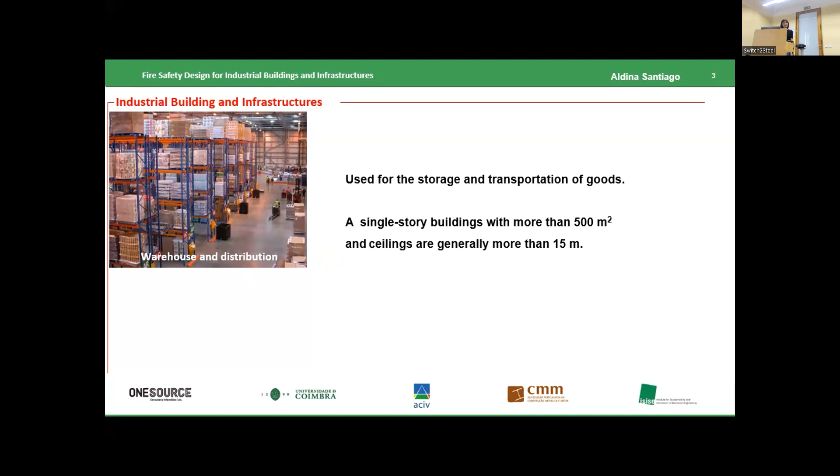It is used for storage and transportation of goods, and normally we have a single-story building with large dimensions, normally with areas higher than 500 square meters and with a height higher than 15 meters. But we are also talking about manufacturing facilities with heavy equipment, and this is very important for this subject of fire safety design, normally this kind of building has 3-phase electrical power, with a high capacity of ventilation and a high system of exhaustion.

In general, these buildings also have pressurized air, water lines with floor drains and storage tanks. But we are also talking about refrigeration and cold storage, normally used for food products, with small or large rooms for cooling and freezing. And we are also talking about buildings for telecom and data hosting centers, again large facilities with extensive computer servers and associated equipment, normally with redundant power supply, with heavy equipment, and normally with a strong floor to support this heavy equipment.

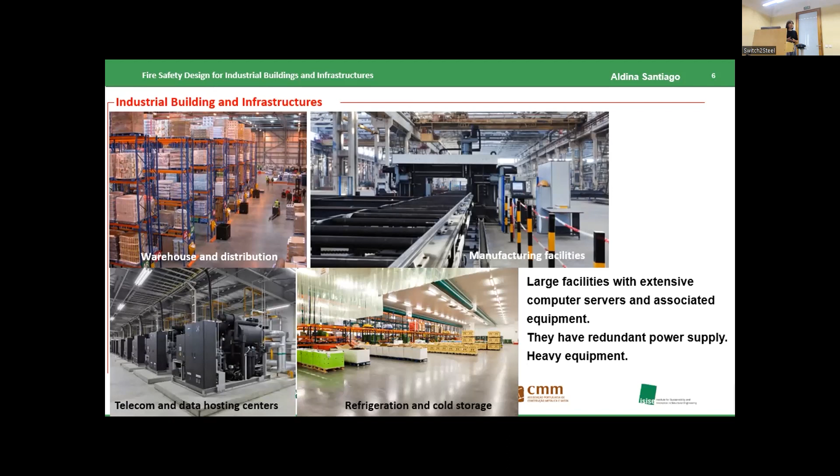And about infrastructures, we may say tunnels, terminals, large compartments, at least in one direction, in this case with high ventilation. So we have here some examples, at least 6 examples of the scope of buildings that are in the scope of this presentation. So this is how we try to answer the first question. And now about the second question.

I also tried to find official numbers, and from 2021, the last official numbers we have show 654 industrial fires in Portugal. That means more or less near 2 fires per day in industrial buildings. So this number is too large. The number of fires in industrial buildings is too large, and this is the reason why we started this project, and why now, at the end of the project, we have this seminar.

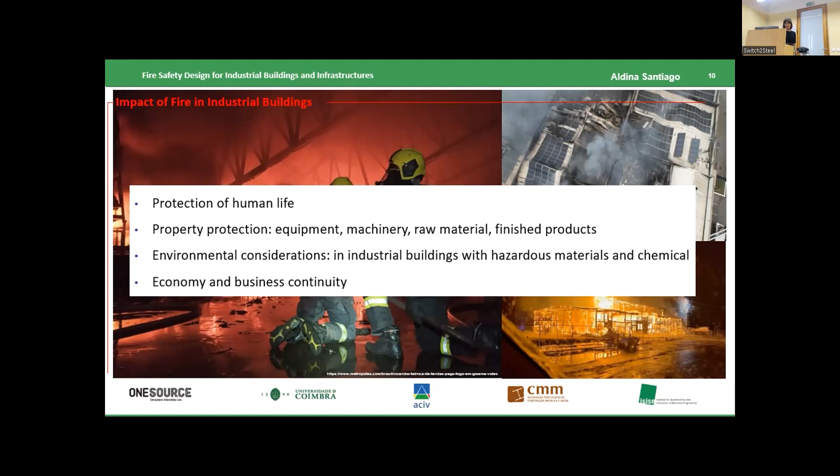And of course, at the end, we have the loss and the interruption in the economy and in the business of these factories.

So now I will pass to the second point, related to legislation. I will start first with an overview of the Portuguese legislation for this kind of buildings, and after that I will make a comparison with the European legislation.

Starting with the Portuguese legislation, we have two documents: Decree Law number 123, the last version from 2019, and Technical Regulation 1532, whose last version, though not from 2008, has its main contents from the 2008 version.

In the first document, we have the organization of the different types of buildings and enclosures. We have defined, at this moment, 12 standard uses for the different buildings, and for each one they are organized into 4 risk categories. After, I will show how to calculate this risk category.

The second document provides the technical regulation for fire safety design in terms of fire behavior, insulation, and fire protection. So first we make a characterization, and after we do the fire design.

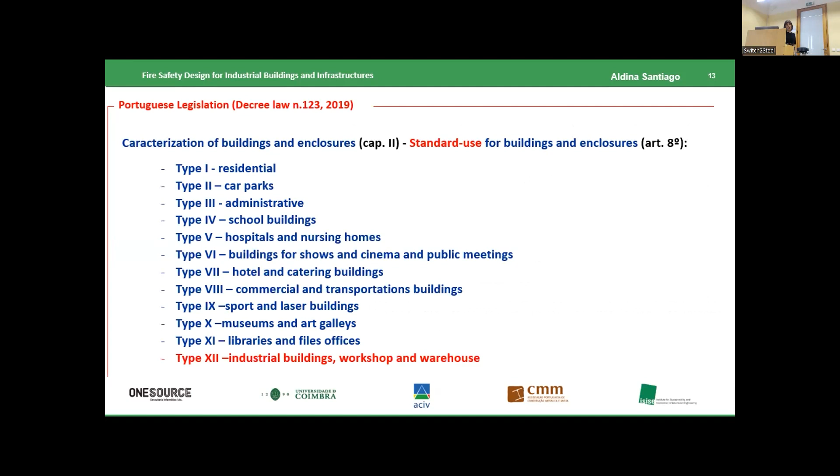Starting with the first document, as I said before, we have 12 standard uses, all of them shown here. For this specific case, the industrial building, we have standard use number 12: industrial buildings, workshop, and warehouse. After, as I said, we need to calculate the risk category.

We have 4 risk categories, from the first to the fourth. The first one is a reduced risk, and the fourth category is a very high risk. How to calculate this risk category?

There is a table defined in this decree law that allows calculation of this risk category based on the number of floors below the ground floor, and also based on the modified fire load. This modified fire load would be calculated based on a deterministic approach or a probabilistic approach, but in both cases it depends on the materials and all the contents of the compartment.

In this case, the industrial compartment. So after that, it is possible to define what is the risk category for our building.

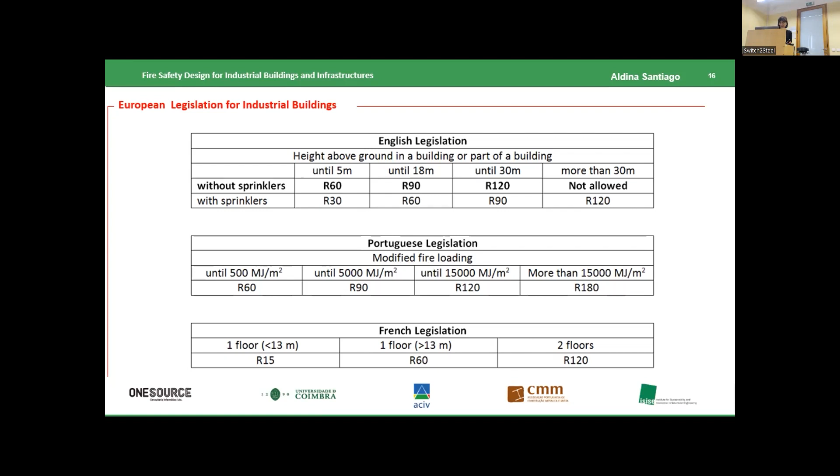Now I go to the third topic, the principles of the fire safety design, starting with the fire safety of the industrial building, the main concepts. First, fire prevention - good maintenance of the equipment, for example, but also the fire detection and the alarm system, the detection of smoke, the detection of flames, but also the need - this is imposed on the design - the emergency planning and evacuation. All occupants of the building should know and understand the fire evacuation plan.

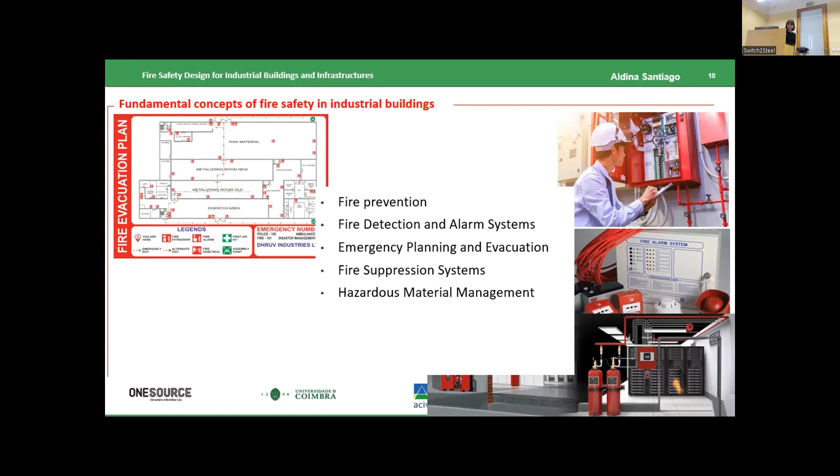And after, the existence of fire suppression systems, for example sprinklers, the good storage of hazardous materials, the continuous training and education of workers, and at the end, probably more directed to our seminar, the design of the structure according to the standards, taking into account the necessary fire protection for the structural elements.

Now looking at this last topic, the structural fire protection, we could take two approaches for the design, and I divided these two approaches taking into account the typology of the buildings. If we have a small compartment, it is possible to assume a uniform temperature in all the compartments - the same temperature at each point - and this temperature could be calculated based on the nominal curves that we have in the standards.

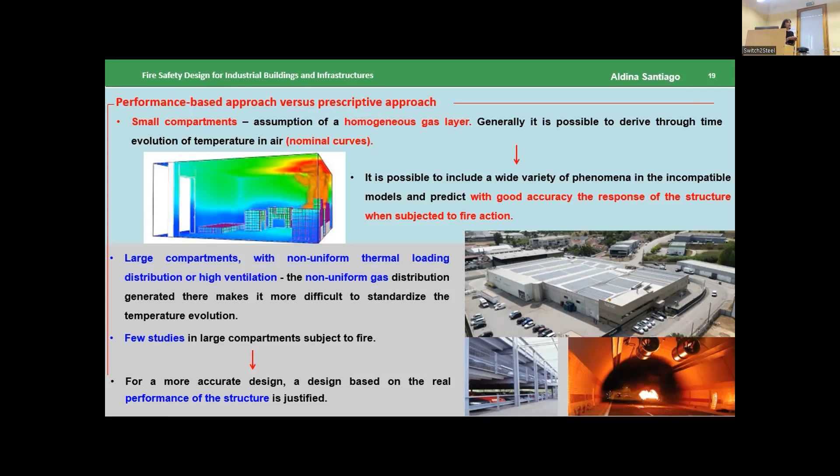However, if you have large compartments with non-uniform temperature and large ventilation, it is very difficult to have uniform temperatures, so the nominal curves used for small compartments are not possible to use in this kind of compartment. We have this situation for industrial compartments. So the nominal curves that we have in the standards are not possible to apply for this kind of building. In this kind of building, we should make the design based on the real performance of the building, taking into account all the conditions of the building.

According to the Eurocodes, when we have a well-defined compartment, it is possible to do a prescriptive approach design. In this prescriptive approach design, we make the design based on nominal curves - we have, for example, the well-known ISO 834. And after that, we make the analysis of the structure, which could be the analysis of elements, substructure, or the entire structure.

And after that, we make the design of the elements, the substructure, or the structure. The design for the elements, for example, could be based on tables, tabulated values - not for steel structures, but for example for concrete structures it is possible to do a design based on tabulated values. And after, it is possible to do the design based on simplified equations or more sophisticated equations.

When a performance-based design is needed, for sure we have more complex calculations, but we have a more precise response and the correct response at each point of the compartment. It is possible to have the variation of temperature at each point of the compartment, to know the transport of smoke, the transport of heat - we have all the details in the compartment. So in this case we have a more accurate design, and sometimes it could be a more economic design too.

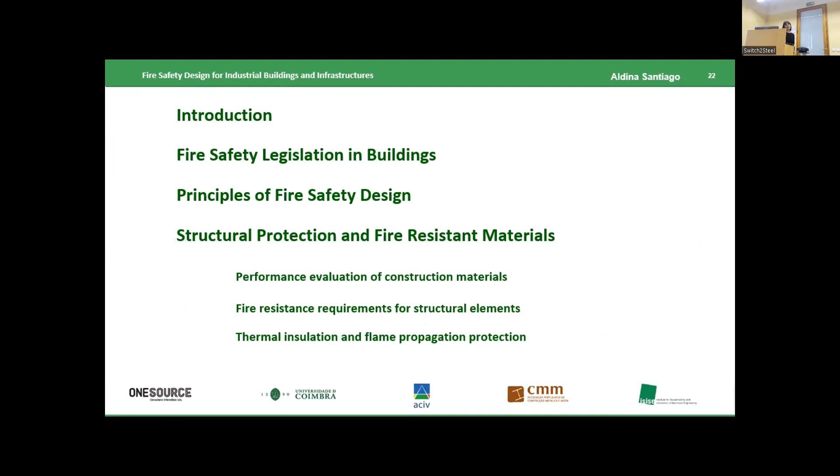Now I go to the fourth point: structural protection and fire-resistant materials. According to the legislation I showed before, we should divide the fire protection measures into two types: active measures, which I already mentioned, like sprinklers, smoke detectors, flame detectors, and passive fire protection measures.

In this case, because I'm looking at construction materials, I'm focused on the passive fire protection measures. In passive fire protection, I have to take into account two different systems. First, the structural system, where I need to ensure the stability and integrity of the building in case of fire. But we also have non-structural systems, where we need to take into account limiting the propagation and development of the fire. To account for these two topics, there are standard tests.

The first is the fire reaction test. These tests evaluate how the material contributes to the development of fire, or better, how it contributes to the beginning, development, and propagation of the fire. Based on these tests, it is possible to classify materials into different classes.

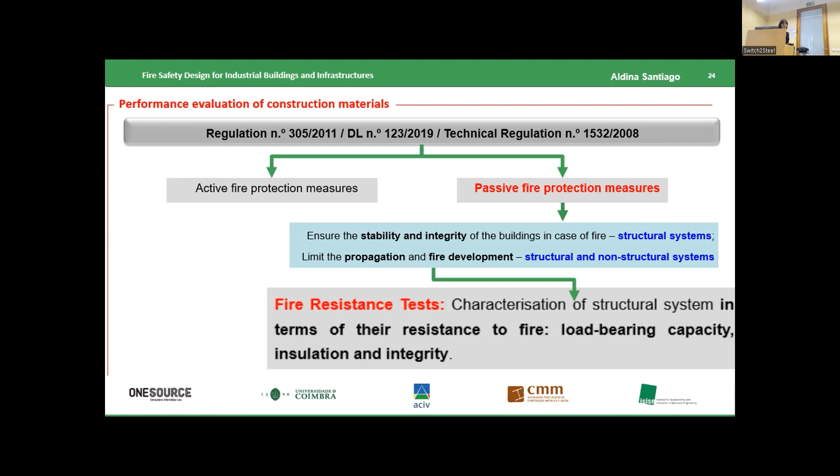The second topic is the fire-resistant tests. In this case, I'm not evaluating the material's behavior or its contribution to fire, but evaluating the structural system in terms of its resistance in fire: load-bearing capacity, insulation, and integrity.

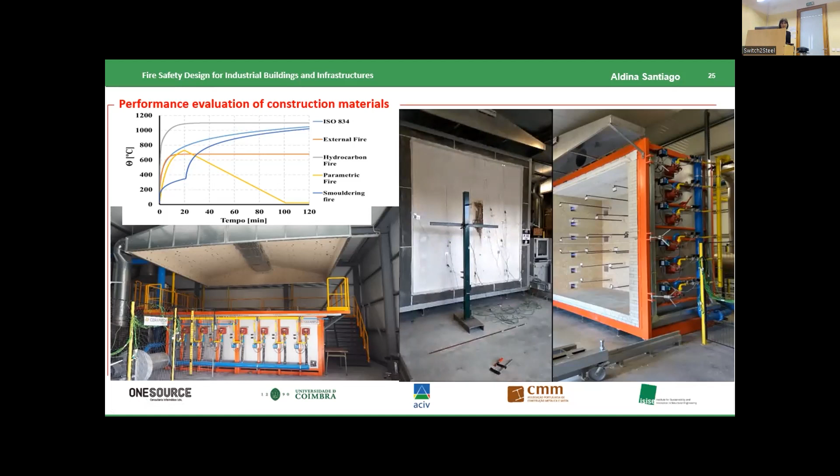We have furnaces here in the lab where it's possible to evaluate this fire-resistant capacity of horizontal and vertical elements, and it's possible to apply different thermal load curves to these elements, the standard curves, but also parametric curves.

After showing the reaction and resistance of materials, I go directly to the standards. The design of these elements is based on the Eurocodes. First, Eurocode 1, which defines the loads. In this case, because I'm looking at thermal loadings from fire, I should look at part 1.2 — Eurocode 1 part 1.2 is related to thermal loadings.

After that, I need to go to the design. There are several Eurocodes for design, and the part related to fire is always part 1.2. Eurocode 2 relates to concrete, Eurocode 3 to steel, and Eurocode 4 to composite structures.

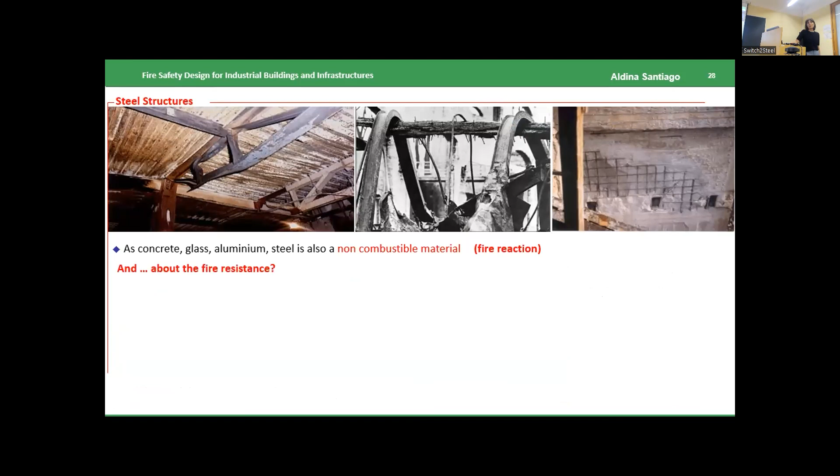Looking at the fire resistance of steel, I know that the strength of steel degrades very fast with increasing temperature. I also know that the thermal conductivity of steel is very high, around 45, while for concrete it's around 1 or 2. We also know that steel profiles are very slender compared to other cross sections, so the temperature increases very fast in the steel cross section.

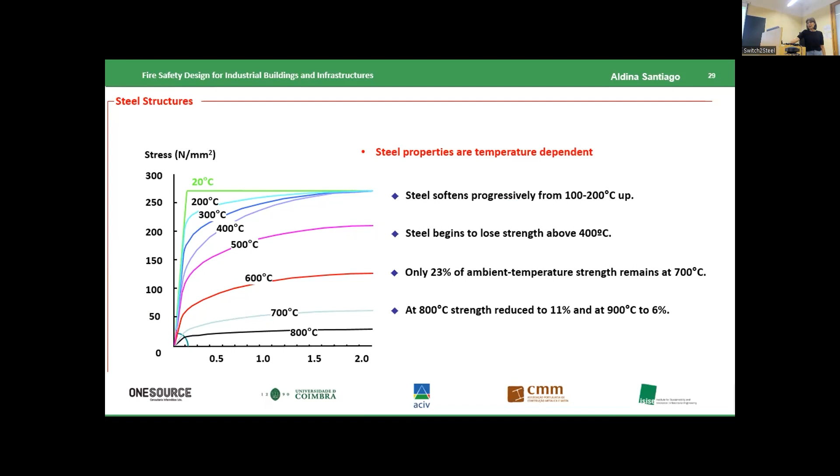I put here to show that the strength of steel degrades very fast. I put here the curves of the degradation of the properties of steel with temperature from 20 degrees to 800 degrees. The steel softened progressively from 100 to 200 degrees up, and began to lose strength above 400 degrees. Only 23% of ambient temperature strength remains at 700 degrees. At 800 degrees, strength reduced to 11%, and at 900 degrees to 6%.

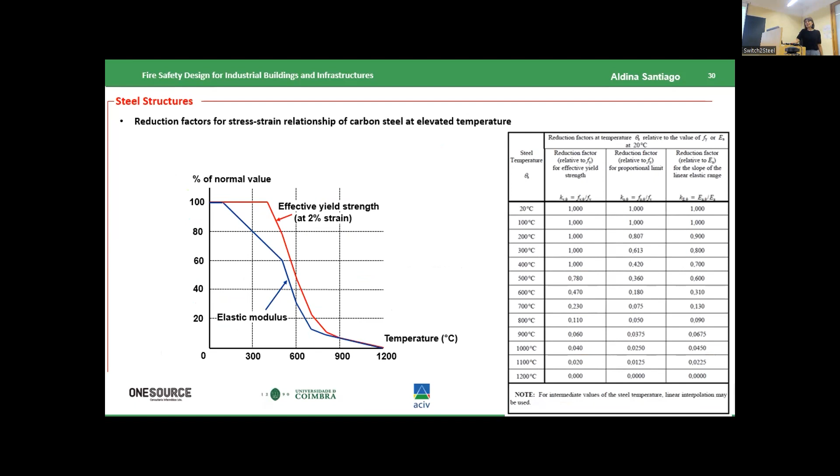Normally, the temperature in a fire in this kind of building is around 1,000 to 1,200 degrees or less, so these values are the normal temperature in a fire in a compartment like that. And the steel melts at around 1,500 degrees. I have here also the comparison of the degradation of the yield strength with the elastic modulus. The stiffness reduced much more faster.

Okay, and to finalize, some remarks about thermal insulation and flame propagation. We need to take into account first the fire protection measures. We need to use fire resistant materials, as I said, for class A, but we need also to consider fire barriers, fire stop, fire resistant insulation.

We need to take into account the compartmentation. Normally, these industrial buildings, as I said at the beginning, have a large area, but it is necessary to have a compartmentation, taking into account the material that we have in these buildings, a division of the structure into fire-resistant compartments, or using fire barriers to prevent the spread of fire and smoke. It is necessary also a continuous fire monitoring and safety system. Okay, thank you very much.

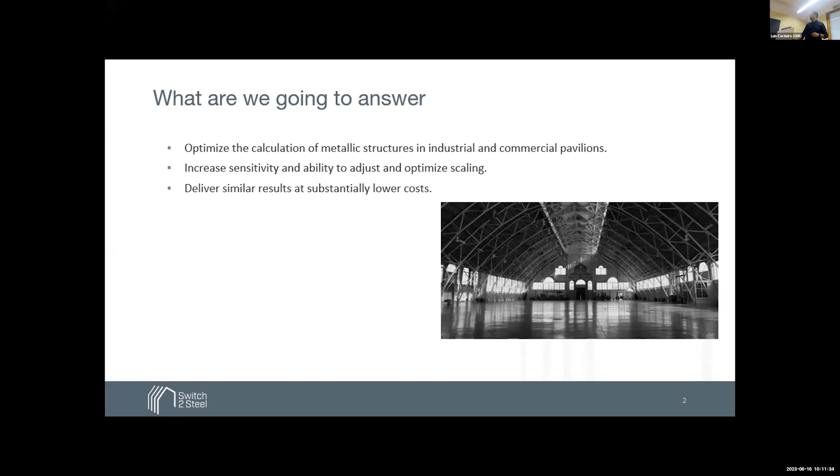To increase the sensitivity and the ability to do these calculations, and to show that we can lower the cost, not only of construction but also transport, maintenance, and many other aspects that involve a building, in this case a pavilion, and how steel can impact these costs and how we can see real value in this. So the problem, as presented before, we have continuous legislation changes. We have legislation throughout Europe, but then very specific country focused legislation, and we need to consider this in all the steps of what we are doing.

It is really difficult to calculate these structures. So many options, so many types of steel, so many types of solutions. We tried to gather all the benefits of these different options and put them together in a way that we can provide you solutions. You can simulate different options very quickly, and find quick and quite efficient results.

Always keeping in mind compliance and safety as presented before, and ensuring these legislations are properly applied to all aspects of what we are doing. That is really important. And again, the protection for fire, which is one of the main drawbacks of using steel, we can identify in an automatic way which is the best solution for your specific needs, and give you an estimation of that cost. You can also compare it easily with other options available, ensure these also comply with legislation, and give at the end the power to the user making these simulations and analysis.

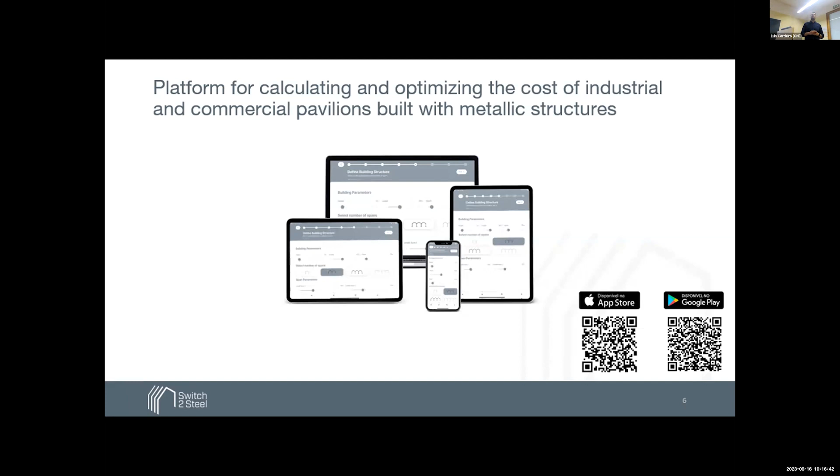These calculations are not done on your mobile phone because they are quite extensive and take some time. You will receive a report and notification when the calculation is done. Depending on what you need, calculation can go from a couple of minutes to a couple of hours, but it's just a matter of what you have identified as the interest for these details.

So the goal is exactly what I've presented before: a multi-channel approach for everyone to access the tool, parameterize exactly what you need, and get optimizations with different techniques for the structure and also the protections needed. Taking into consideration the legislation, as said before, characteristics of the pavilions, fire protection, transport, seismic resistance, and the environmental impact throughout the whole chain of the building, from beginning until the end.

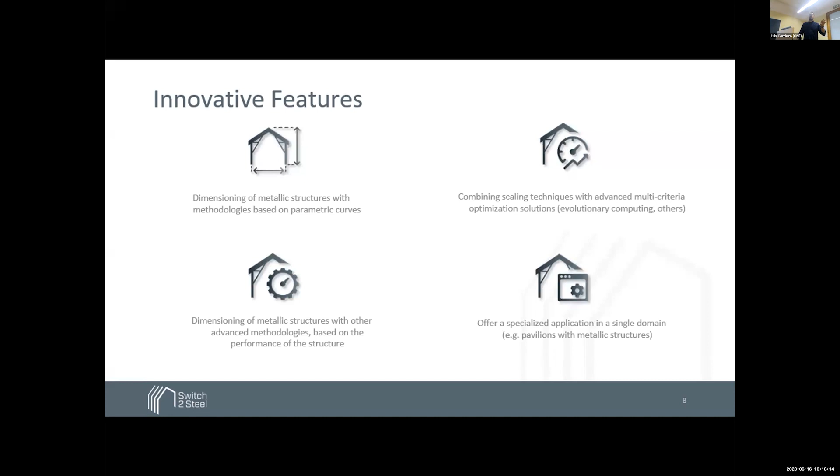So as you can see, there are a lot of innovations in what was done. We identified four innovation aspects of this work: the dimensioning of the structures, the combining of different techniques to give you the best solution, which will be presented later in more detail, the dimensioning of the structure with quite different solutions based on characteristics, and basically a very focused solution on pavilion construction with steel.

Very briefly, and my colleagues will present this in more detail, we have used genetic algorithms for some optimizations. The room and elevated temperatures were taken into consideration throughout multiple steps of the process. We use finite element methods for some of the analysis and optimizations, always considering the Eurocodes in all aspects of what we are doing, to be compliant.

Okay, so I'm missing one slide here. So instead of me presenting the application with slides, we are going to have a real-time demonstration of the application. We will split this into phases. The first one is where we say what we need to build, and the second one is to show you the result of what was done.

We will design a complete step with some predefined configurations. Because that algorithm will take around 20 minutes to run, we will see a pre-calculated aspect of it.

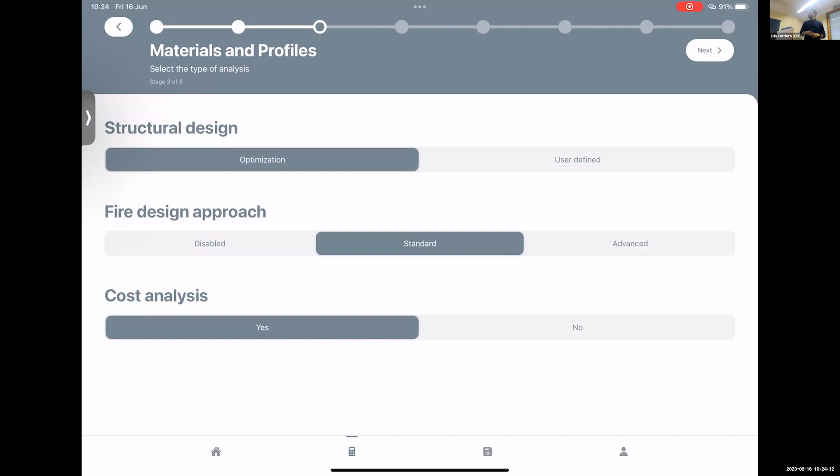And finally, we can even give you an estimate of the cost of each aspect of the pavilion. Okay, and we will see, because we are going to use that option.

Next, since we are working with steel, let's define some parameters of the steel we want to use. Here, you can switch some characteristics of the profile, for the sections, for the columns. You have some options available—not everything is there, we are at the moment limited to a couple of them, but you already have quite extensive options.

Next, let's describe our pavilion—what do we need? One of the key things we have to identify is the spans, how many spans we have.

Here we are going to describe the height, the length of the span, and the length of the building. Of course, when you start changing these parameters, we are already limiting you on the number of spans that you can add.

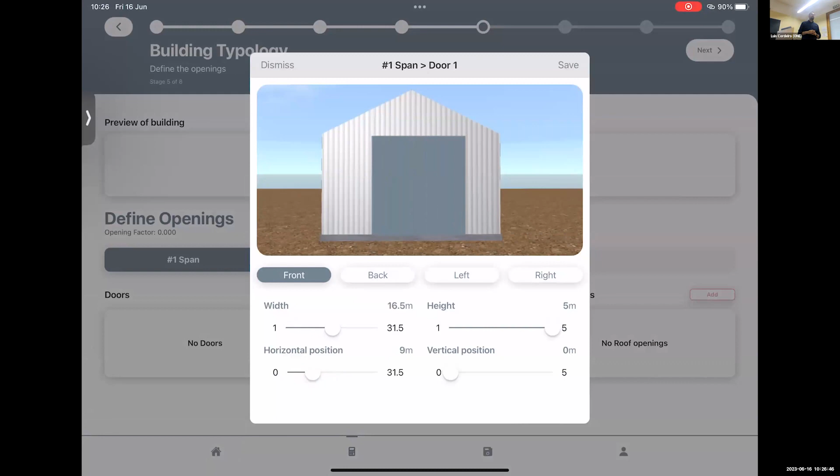So in this case, my colleague is creating a door there. We can create a window. We select the door in the front, and now we have the window on the left, positioning it exactly where we need, because this will have quite an impact.

Not only on the structure, but mostly on the fire protection. This will influence a lot the heat dissipation and how we need to protect our structure based on this. Of course, door, windows, and then we have one of the most important elements for fire protection, which are the roof openings.

Again, we position exactly the openings, how many we want, fully customized, exactly to fit what you need. Remember, I said before that you can build one simulation and then build on top of that a new one.

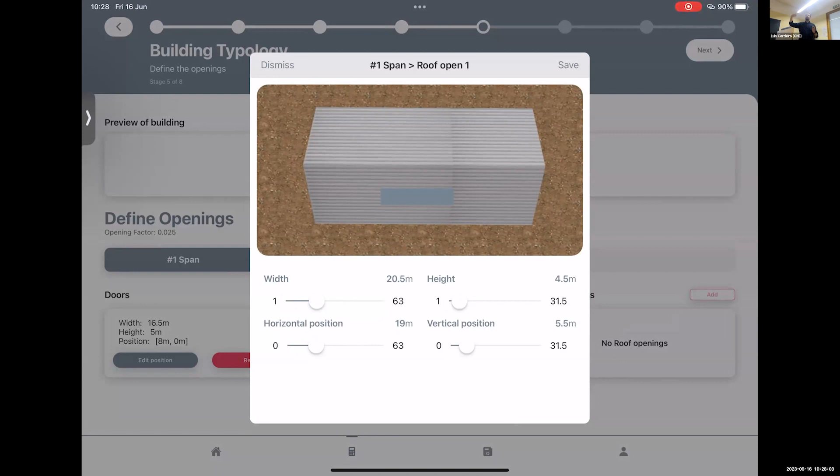Which means, for example, you can test without openings in the roof, and then simulate with openings spread around the roof and assess exactly what the difference is going to be, both in terms of the structure, mostly in terms of fire protection, but also in terms of cost, which most of the time is the most critical one.

Okay, so we can continue. Again, we have defined this only for one span. It's going to be exactly the same for the other one. So, next.

Because we enabled fire, we have a specific screen for fire. Depending on the mode, standard or advanced, we will have different requirements for configuration. As presented before, we need to know what fire resistance this type of building will require.

Is it just for storage, or is it for people to be inside the building? Depending on that, the resistance needs to be different. Also, the country has different legislation, so we have all that option here.

And then we have the type of protections that we want to apply, both in beams and in the columns, and some other characteristics. Let's go a little bit down.

Here we have additional information we can fill in regarding the fire protection properties. Quite extensive, but if we choose different options on top, we have different parameters here to define. Also, if we selected the fire advanced mode, we would have many more options to fill in here. Next screen.

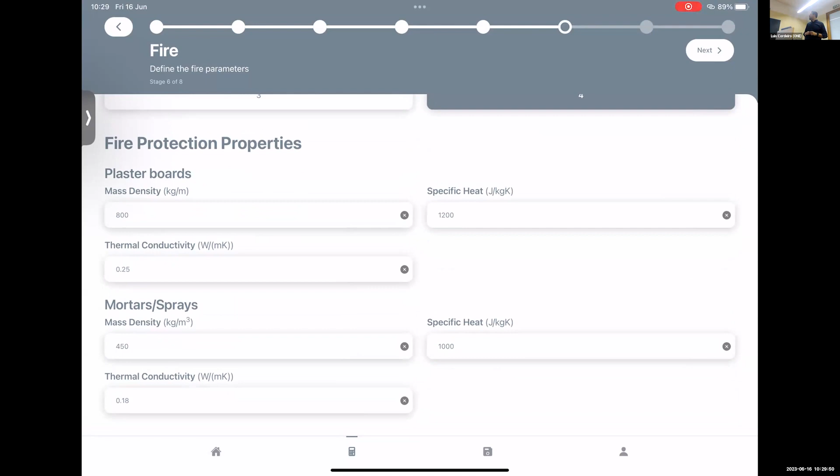Now we have the costs, one of our last screens. We have used the average costs for the materials and for the labor that we have identified.

These values are already preset in the configuration, but each one of you can define your own, because each company has a different way to negotiate and has different values most of the time. So you can define your own costs here and use them for the cost simulation.

Okay, and finally you can go to the next screen. We have the summary, where we can see exactly what we have set. As you can see, we have a 3D model, so you can play around with it on your mobile device or around this. You have the building.

If you see inside the building, there is still no structure inside because we haven't yet started our calculations. But you already see the openings and how the building is placed to validate it's exactly what you need. You can go to the front, left, right visualization just to focus more there.

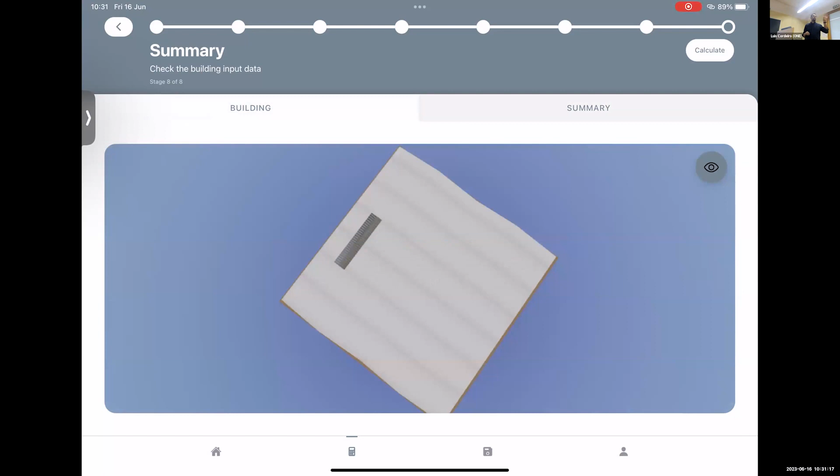Then we have the summary, which is just an overview of everything you have selected before. Then we have the final button to select, which just does your work, calculates everything that I have asked for. Of course, this will take some time. So let's go and see this simulation already calculated.

Okay, so we have here the demo, and this is basically the final screens that we get. So we have a summary, and we have now the 3D visualization again. But the big difference is that if we go inside, we already have the structure. All of this was calculated using all those optimizations that I talked about, and my colleagues will describe in more detail next.

And you can visualize everything from this perspective. Then we have quite a comprehensive view - okay, we can see only the structure. So if it's easier to identify, you can select the beams and get the details of each one of them, the columns, all of that.

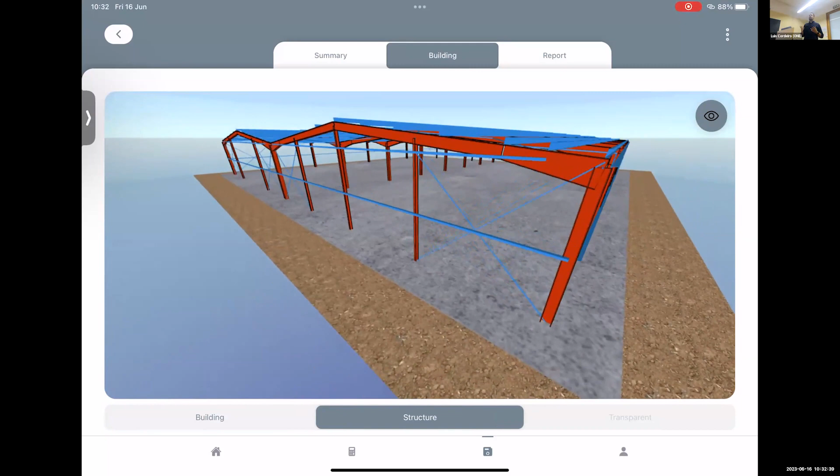And we have the report, which at the end is what we really need, composed of some generic information. We have all the information about the structure. Of course, we have an advanced version of the results provided, but this is the summary, which usually is the most relevant one.

So we have the structure information. Then we have the fire protection aspect - what was identified as the optimum solution for the fire protection. And finally, the costs.

Again, the costs - we have the steel costs, the transportation, the assembly, the fire protection, and at the end, the total cost. Okay, and basically this is what we have developed in this project and what is now available for you to experiment, to use, and also to give us some feedback on what was done.

Okay, and with this I conclude my presentation. And if you have questions, I think it's better if we address them all at the end.

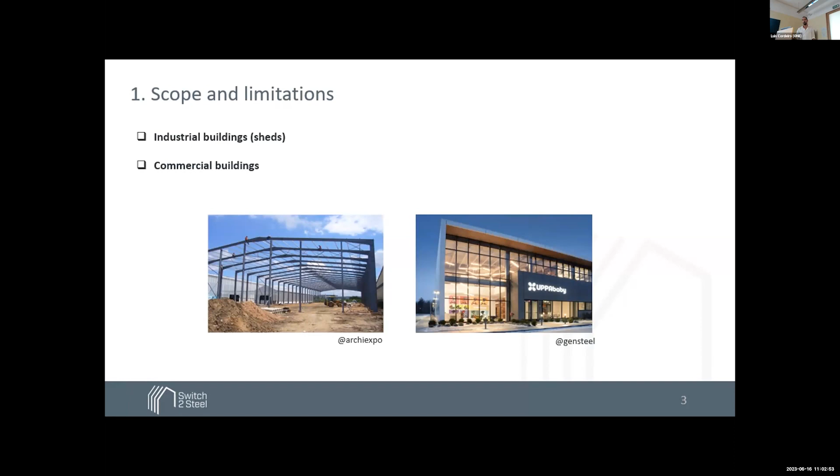So the scope of this app and of this project - I think already the Professor Aldina and Luis, they spoke about this. So it's mainly about the industrial buildings or the commercial buildings.

When we started, it seemed it was going to be very easy to identify these kind of structures, but when you start digging into every aspect of this structure, it turns out to be very complex. So there are many aspects that we had to address here.

The type of utilization, mainly because of fire protection, then the different typologies, dimensional limits, profiles, connections, bracings, and so on. So I'll go through each and every one of these aspects, just to understand what is hidden behind the project.

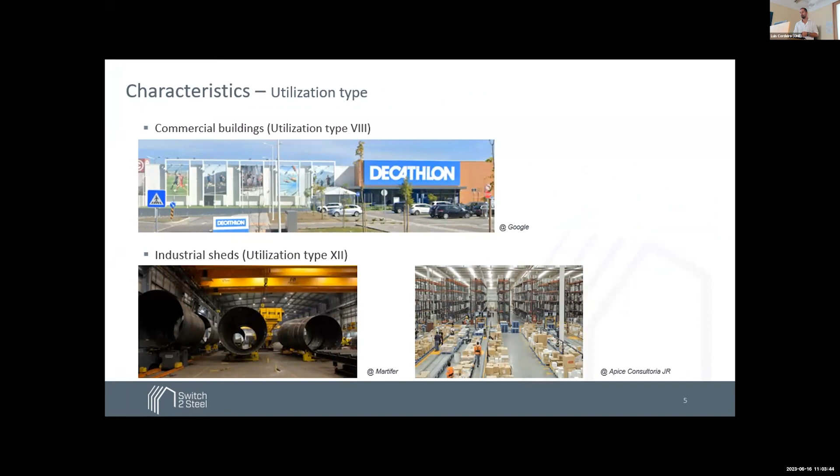In terms of the utilization type of the buildings, as we said many times, it's mainly industrial sheds, but also commercial buildings, mainly based on a portal frame design. So the different typologies are covered in the app. Here you can see several typical examples.

We also identified, this seems very obvious, but in fact it's quite different what kind of rafter you have at the top of the building. Is it just a uniform member? Is it a tapered member with haunches? Different variable cross sections in an area closer to the column, closer to the apex, and so on. All of these aspects are something that is really tricky to calculate, especially manually.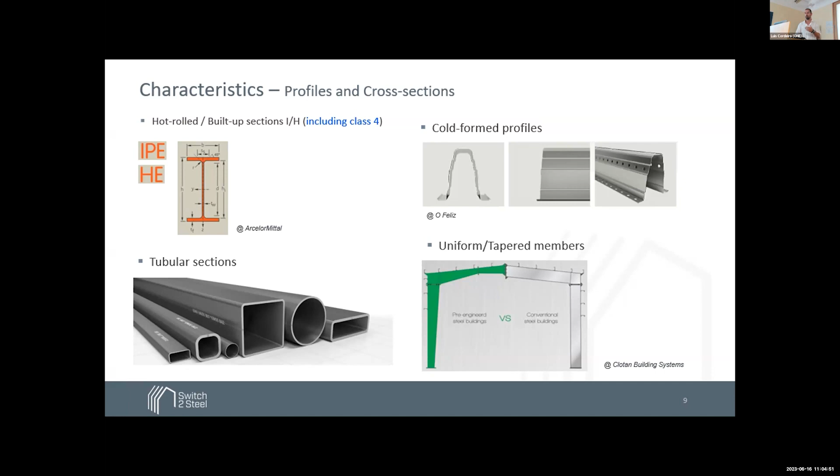Then also the connections, the base of the columns can be fixed and pinned. Then the corners, so this connection between the rafter and the column, it's a haunch that we also calculate some pre-design of the connection, so it's not fully a full design, just a preliminary. And then also at the apex there is a similar type of connection. Then the bracings, all possible configurations and all possible types of profiles, mainly tubular cross sections.

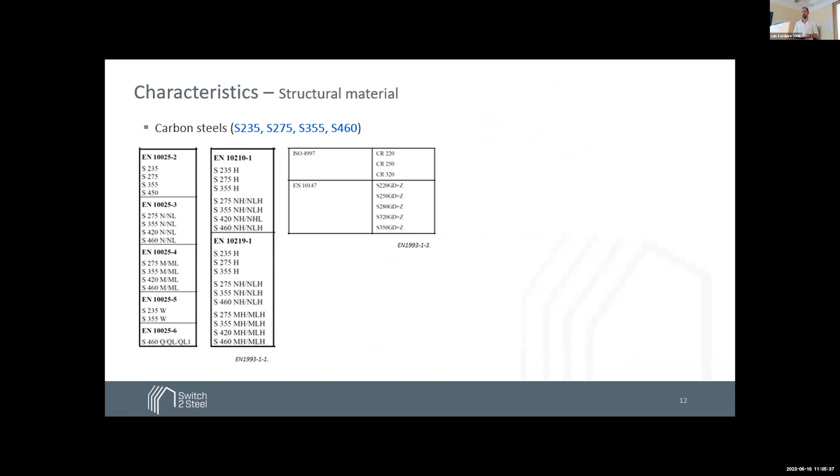Then the steels, the carbon steels are used in this project, so conventional steel grades, not the high strength steels or stainless steels. And then also the fire protection materials, we try to include here all the relevant fire protection materials that are currently available on the market, including sprays, mortars, plasterboards, and paints. So this is the scope of the project.

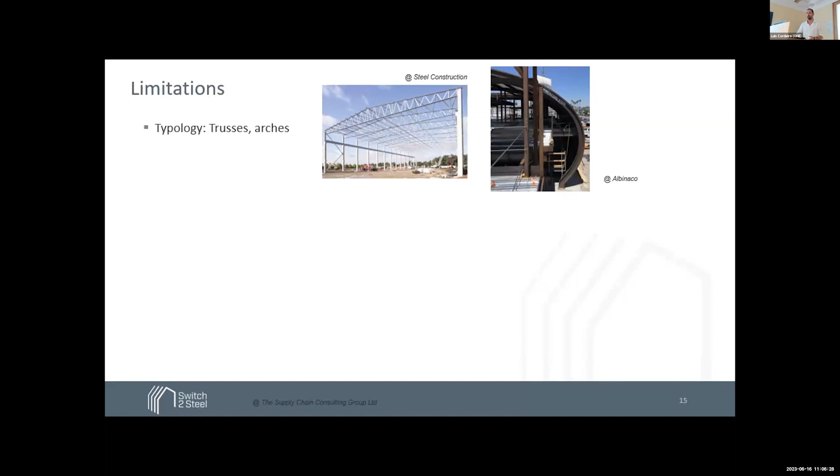But of course, as I said, there are some limitations. First and foremost is the typology. There are no trusses, at least not in this version of the project. So maybe in the future we will have Switch2Steel plus or something that will include also the trusses. It's not difficult, but it takes a little bit of exercise to play with the optimization of all these profiles. And also some very specific geometry such as arches is also not involved in this project.

Then the dimensional limits, we put some limits in terms of the dimensions, something that is found in the literature. It's not that the computation cannot go beyond 120, it's just that it doesn't make sense to allow the user, some kids, to put a length of 2 kilometers or a height of 100 meters. So this is something that is commonly used for this kind of buildings.

And in terms of the loads, I will come later to the loads that are included, but the cranes and the loads from the cranes are not involved. So this is warehouse buildings with storage, so the cranes are not involved. And also there is no explicit calculation of the foundations, only the upper structure of the steel.

Then the calculation algorithms. Here I would divide all the calculations into 3 groups: the structural solver, the structural design, and the structural optimization. The solver is probably the best feature of this tool because we have our own solver. It's a linear solver, and for this kind of buildings with very severe stability issues and variable cross sections and some very specific problems and aspects, it's almost impossible to use some simple databases and so on. So we have our own solver that calculates precisely what is the response of the building.

Also, for this kind of buildings, as you may assume, it's really important to take into consideration second order effects, and of course for that you have to have your own solver. So all of these aspects are covered both at ambient temperature and at fire design. So this is just a flow chart of what I just said. The client or the user of the app needs to give us the inputs, Cordeiro already showed that. And then we somehow split the calculation flux into two parts: the one is the ambient temperature, on the left side, where we optimize the structure without considering the fire at all.

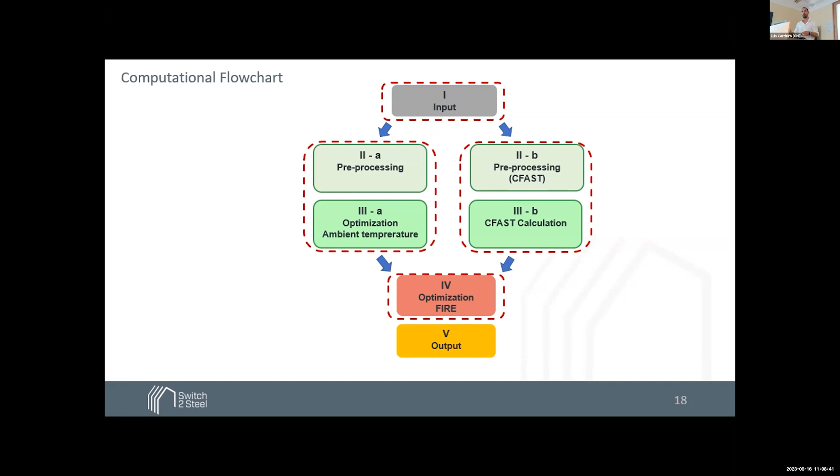At the same time, we have the CFAST calculation of the fire curves - this is really important. These two results join in an optimization according to fire. So once we have the structure and the advanced calculation of the fire, we can finally optimize the fire protection, and of course there is the output. So the biggest effort here was in these two steps: including the solver, the design, the genetic algorithms in the first case, and then the fire protection material optimization in the fourth step.

Let's say something about each and every part of these algorithms. In terms of the structural solver, it's a linear elastic solver, finite element based, using the beam elements.

We use Python code here to write this, and the advantage is that the load combinations and load actions are automatically calculated for you, so you don't have to go into the code and calculate the coefficients, especially for the wind. This is really handy - generating load combinations automatically is done in a matter of seconds, which is a great advantage, because in the beginning I remember having to calculate and check everything manually. For one of these, it could take a whole day.

There are some other features here, such as second order effects that I already mentioned. This is really important, and for that you need the solver and extra possibilities such as eccentricities, semi-rigid connections, and so on.

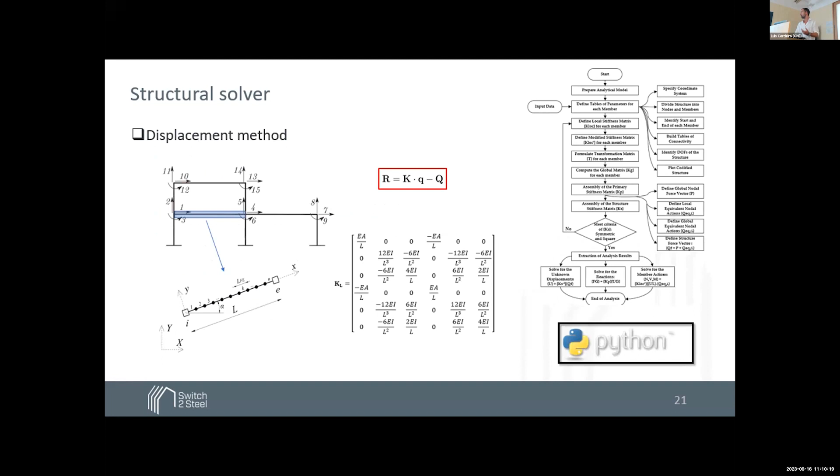The solver is finite element based, using the displacement method, so we build the stiffness matrix of the whole system. Such a routine is very convenient for Python code or any other language - we use Python. The objective of the solver is to get the internal forces, reactions, and displacement at every node, and from that point we go to the design.

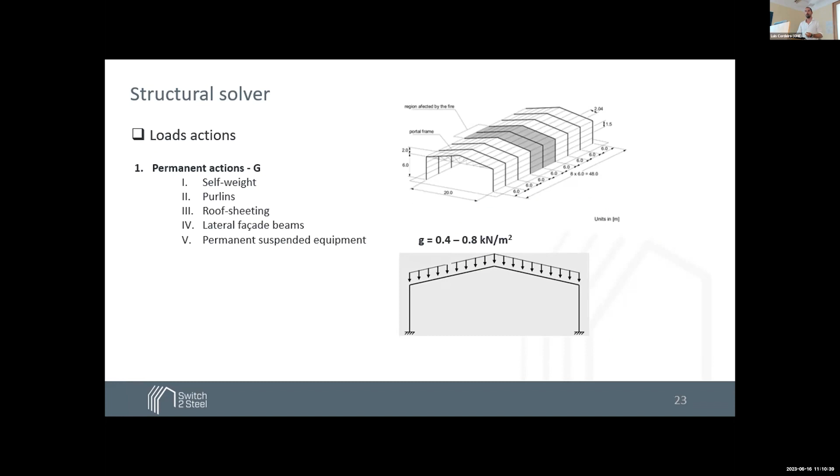In terms of the load actions already involved in the solver, we have the permanent actions, then the imposed loads - this is pretty much based on the Eurocode design for imposed loads on the roof.

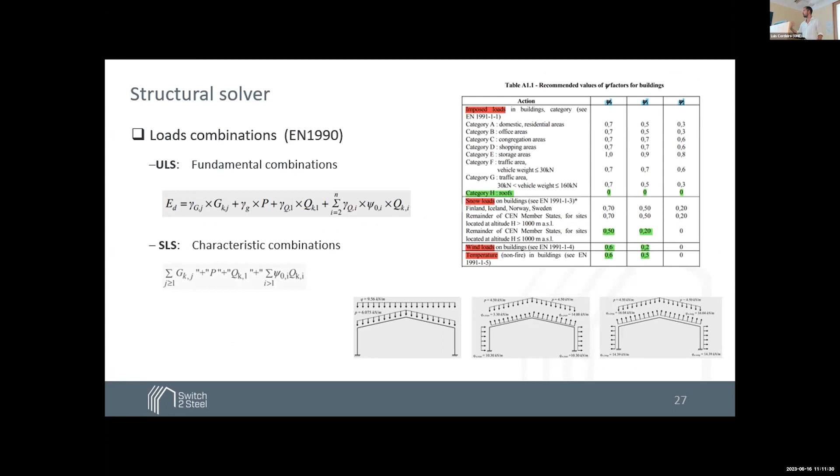Then the load combinations for ULS, the ultimate limit states, and for the serviceability limit states, are also calculated automatically for you and applied on the structure.

Other features, as I said, I explicitly included the second order effects using the stationary potential energy principles, so we can calculate the critical force, and the second order effects are implemented using the amplified sway moments. Then the semi-rigid connections are also included - that's a possibility if we want to play a little with the rigidity between the rafter and the column or any other part of the structure. You can adjust the stiffness of the connection.

Then this was the solver. Once we have all the results, we can go to the next step, the structural design. I'm not going to go into detail here because this is very basic stuff from the Eurocodes.

For the ultimate limit states, we have to do the classification - as I said, we cover all possible classes, including class 4. Then the cross-section checks, the cross-section level verifications, member verification, stability - which is probably the biggest issue for these kinds of structures - and then the connections. For the SLS verification, we verify the displacements, both vertical and horizontal.

Then some extra features. For example, these corners of the portal frames is something that looks obvious, but in fact it's a really tricky calculation behind. So it's a double flange cross-section, and then you need to consider all possible positions of the neutral axis, especially if it's a class 4. It takes some effort to do that. So this is done automatically.

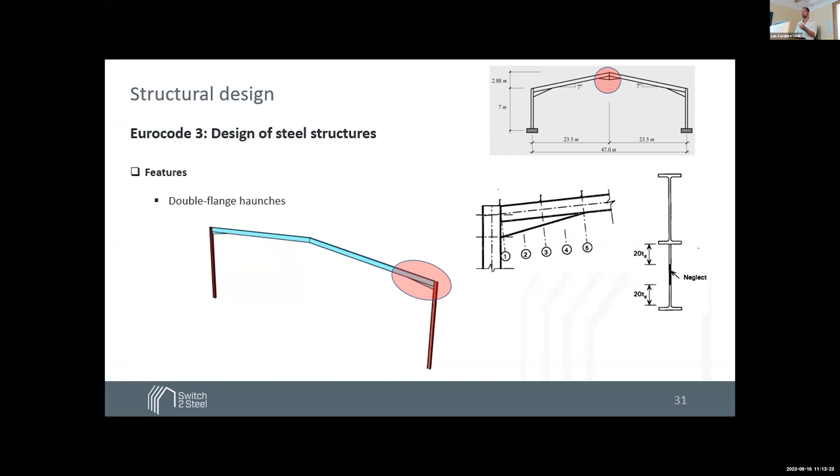Can be at the corners of the frame or in the apex, as you can see on the top of the slide. Then we also have the tapered members. This is one of the reasons why we opted for our own solver. And of course, you can vary the thicknesses along the length to optimize.

In some cases, you can have the length up to 60 meters. So the point of these structures is really to consume the least material possible. And for that, you need to have the proper solver to calculate the stresses and also the forces in every part of the structure. So this is done automatically.

And then there are some specific aspects for these kinds of structures. So we have the purlins on top of these buildings, and they can act as the lateral restraints. But if you have wind, then the bottom flange, which doesn't have any purlin, is exposed to compression, and there is a problem with stability. There is no such calculation provided in the codes. So we use some literature from the King and SCI publications to calculate this kind of phenomenon.

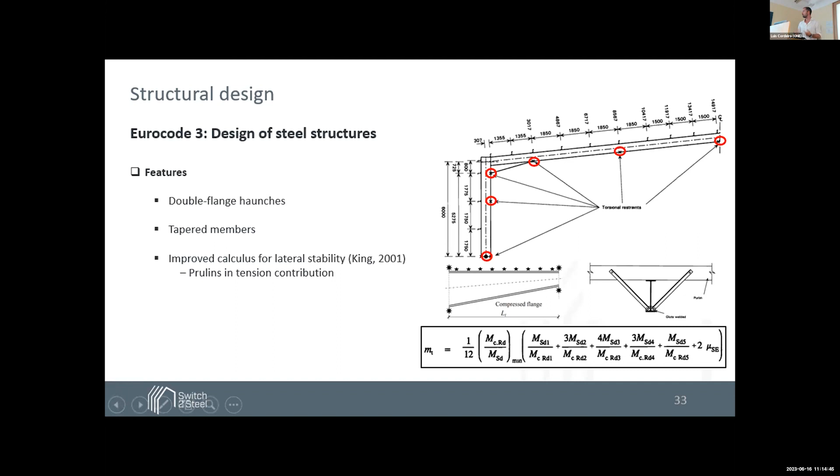So the point is that even if the top flange is in tension, there is some benefit from the purlins, and this has to be calculated somehow. In these SCI publications, we have this method. So this is also included here.

Finally, there is a class 4 cross-section included. This is something that is quite simple if you have just an axial force or just a bending moment for the symmetric cross-section. But in many cases, especially for the tapered, monosymmetric cross-sections, the problem turns out to be a little bit more complex. So this is all involved in this calculation.

And then last but not least, there is a fire design. Our methodology here is pretty much based on a typical method that is used. We have two steps. In the first part, we treat the fire load, so we calculate the fire curve.

There are two options, as you saw in the app. There is a standard curve, and there is the advanced curve, which is the natural curve using another software that we linked to our platform. And then the mechanical actions are included through the load combination, accidental ones from the Eurocode. So this is the fire load, let's say.

And then in the second step, we have the structural response and the structural design according to the respective Eurocode 3.1.2. So this is also done.

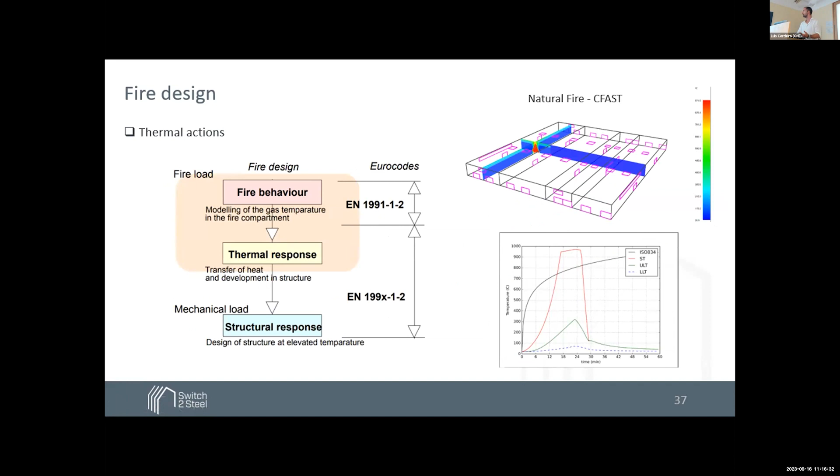And when I say the fire curves, there are many fire curves. There's the ISO standard curve, there are some parametric curves, but in this project we use a very sophisticated way of calculating the curve, this red one, which accounts also for the decay of the curve, which is really important. Significant savings can be made in fire protection if we use this kind of curve and not the ISO curve. So any possible number of compartments and openings plays a significant role here, and this is what we are doing in a matter of a couple of seconds. So this is the advantage of the tool.

And then the second step is the application of the accidental loads according to the code. Then we have this heat transfer according to the code for unprotected and also for protected steel cross sections. And then in the last step, once the steel frame is heated, let's say, we have the decline in properties. This is important on the level of the solver because the properties change. And then we have the matrix of the system also varying with the changes of the modulus of elasticity.

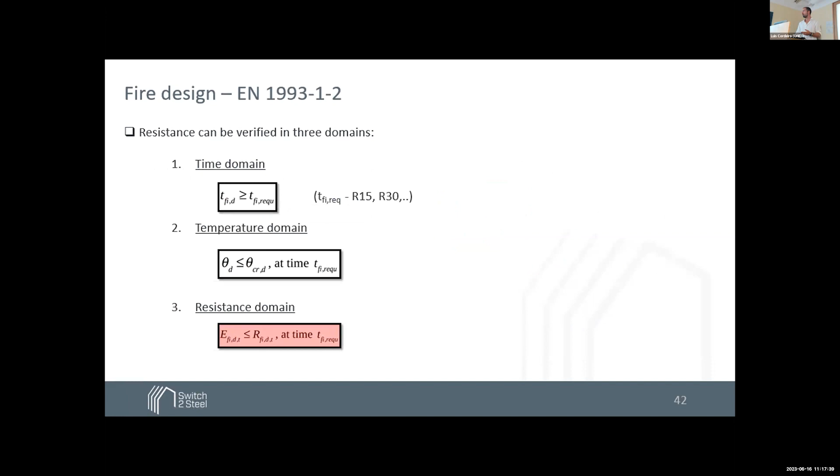And then in the structural design, with the new properties of the steel, we calculate the resistance of the elements. According to the code, as you know, there are maybe three ways to verify the fire resistance. We use in this project the resistance domain, so it's pretty much the comparison between the resistance and the applied load in terms of fire.

And then the third part, the third group of algorithms is the structural optimization, which is applied, as I said, in this phase using the genetic algorithms and also for the fire protection.

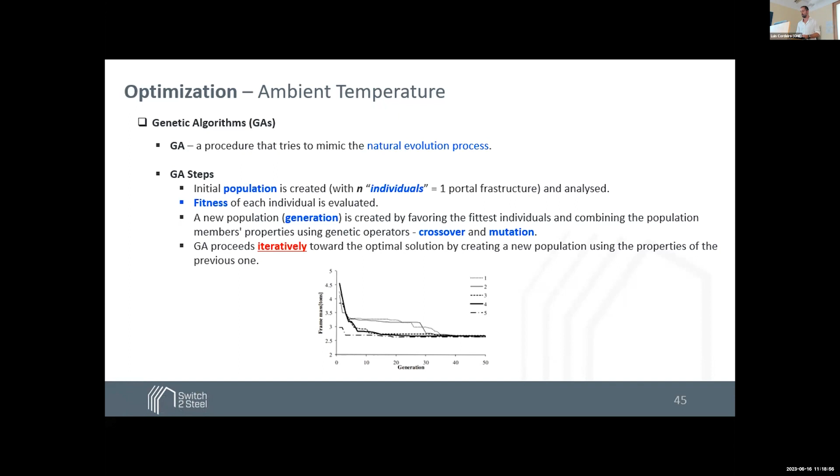So pretty much this is what takes some time, especially for the built-up cross sections where we have so many variables. This can take some time if we want to really choose the best solution of all. Of course we can relax this a little bit to reduce the time, but then we cannot guarantee the solution will be absolutely the best. So this is just a compromise between the time and what we want.

This is the mathematical description of the genetic algorithm. There is a fitness function, which is the quality of every specimen, obtained by either maximizing or minimizing some weight and costs. For us it's obviously minimizing the cost and weight, and there are some main constraints, which are the ULS and SLS verifications. Finally, the genotype is really important to see what we can optimize, what are the variables, and what are the key aspects we want to attack here.

As I said, for the built-up cross-section there is a really wide range of parameters, because you can technically optimize every possible thickness, and then it takes some time. So this is the genetic algorithm involved.

Now about the cost of the frame - we currently calculate the cost of one frame, because to calculate the cost of the entire building there are so many unknowns that we didn't want to specify. As Cordelia said, every company almost has their own panels for the roof, different things not covered in this project. So we don't have the database on all the panels that can be used in the industry. We wanted to specify here that there is a limit - we calculate the cost of what we calculated, and the rest is something every company can add as extra cost.

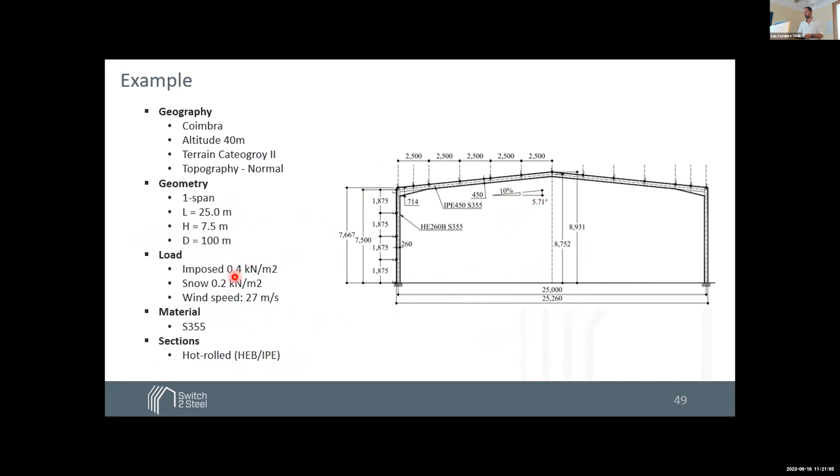This is very simple to apply using the tool. All these inputs you can literally define in a couple of seconds on your mobile - what is the location, what are the materials, what are the profiles, and finally what is the geometry. So this is what you saw in the previous slide, already defined here as the input.

Then, for the sake of this presentation, we compared our results with the finite element method, using the Abaqus model. This is done in collaboration with Laim, our colleague Luis Laim, and also with Pega - she's going to present her work, I think, more in detail about this. I'm not sure if that's your presentation, but generally we carried out much more sophisticated calculation here for one load combination only.

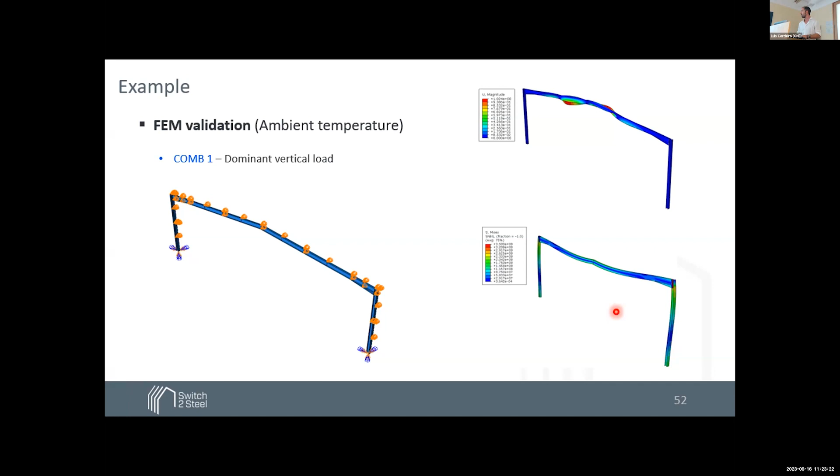And okay, this is the buckling behavior, and this is the ultimate state, so the failure of the frame. And this is the shell model. So we try to really have the imitation of, let's say, reality, just to see how far we are with our tool.

But then when we start comparing a little bit the time spent for obtaining this result and this one, it's almost incomparable. Because for the Switch2Steel, the modeling takes 5 minutes for somebody who never used this tool. I believe it's less than 1.5 minutes to run the analysis, especially for the user-defined case, which was the case here. It's also a matter of 30 seconds maybe.

And then for the shell model in Abaqus, if you're very experienced with Abaqus, you need up to 2 hours maybe to do this. And then for the calculation, only for one combination, it takes a couple of hours. So if you want to do the 14 combinations that we did, this would take probably the entire weekend or maybe 3 days, I don't know. So this is the compromise, and I think the 10% difference is something we can always accept with a couple of minutes of calculation.

Then the second phase, this was at ambient temperature, the comparison, and then there is the fire load. We used here the standard ISO curve just for the sake of the comparison. In our tool, you can easily define what is the fire resistance. For example, 60 minutes we chose in this case, the standard curve and some fire protection here.

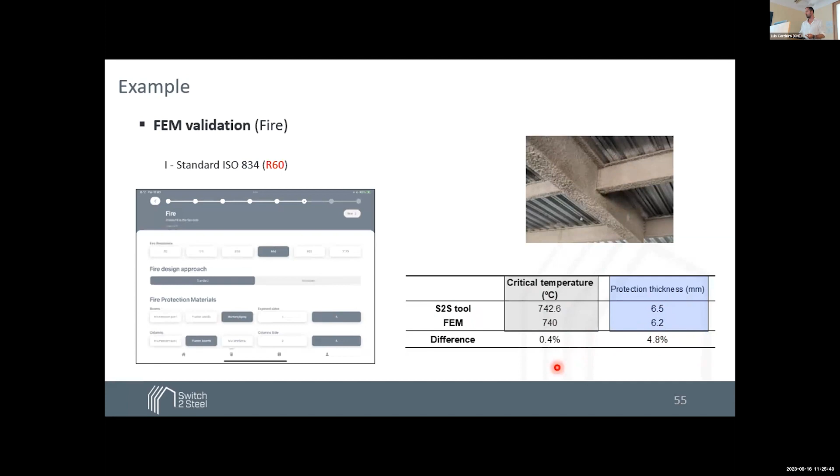What is the best part about the tool is that you can define much more advanced fire curves and the fire calculation, varying the properties of the walls, of the floor, of the roof, of any material. You can vary and place as many openings as you want to assess how it impacts the calculation. You can choose any of the fire protection materials, and how many sides of the columns or beams are attacked. So there's so many options that we included in this part.

And then using the tool in a couple of minutes almost, you can do the optimization of the fire protection and the strategy for how you're going to protect your building. And as you can see, we can go down up to 2-3 times more economical solutions. So this is, I think, the biggest advantage of this tool, that in a matter of a couple of minutes, you can really calculate the fire protection. So this is the good thing.

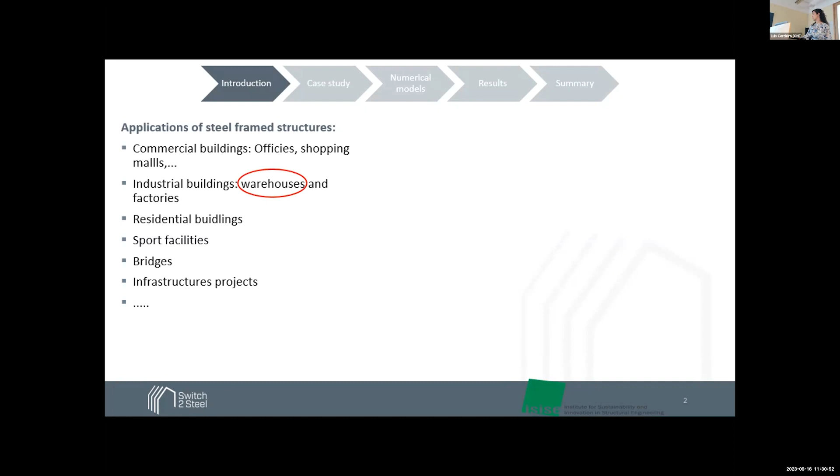Here you can see some applications of steel frame structures like commercial, industrial, residential, and so on. We're going to focus more on the warehouse building, as it's selected as a reference case study here.

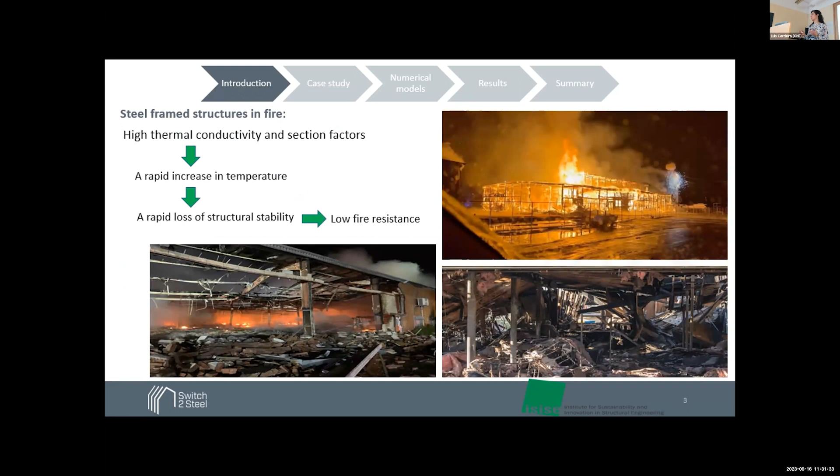But fire in these steel frame structures can be dangerous because of a rapid increase of steel temperature as a result of high thermal conductivity and high section factor. This sudden increase of steel temperature can lead to a decline in structural stability, making these steel frame structures have low fire resistance and compromising their competitiveness in the construction sector.

So the question is, what is the solution? Fire protection materials can be one of the solutions for that, and gypsum-based fire protection coatings are used in this study.

The reason for choosing them is because their effectiveness in improving the fire resistance of structural steel members has already been proven in research studies carried out at the University of Coimbra, especially when high fire resistance ratings were required.

These fire protection mortars can be used in different ways, like boards, sprays, and mortars. This developed gypsum-based mortar is composed of light-weight aggregate, expanded perlite, and gypsum plaster. It has very low thermal conductivity and very good specific heat capacity, making it a perfect solution to protect steel frame structures against fire.

So what's the objective of this study? The objective is to evaluate the numerical fire behavior of these structures, protected with fire protection mortars, using three-dimensional finite element models developed in Abaqus software, and to calculate and optimize this fire protection for industrial and commercial metal buildings.

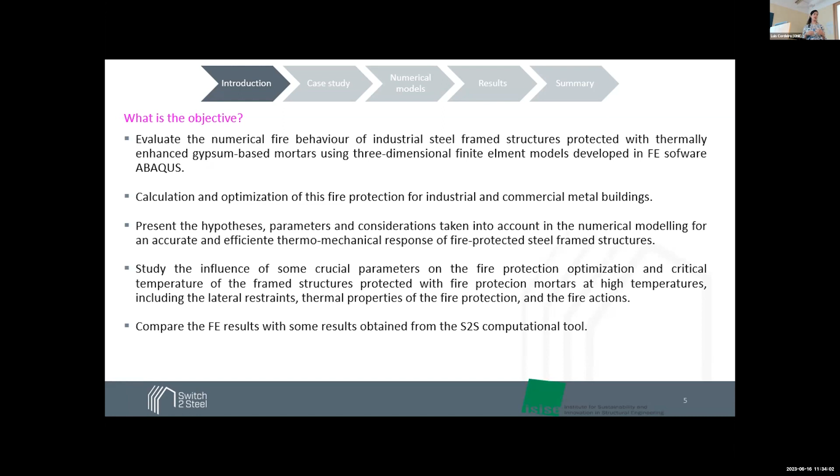And finally, comparing the finite element results with results obtained from the Switch2Steel computational tool that Philippe talked about in the previous presentation.

For this work, an example of a two-pitch steel industrial shed located in Figueira da Foz is selected as a reference case study. The span of the main portal frame is 25 meters, with a column height of 7.5 meters and a roof slope of 10%.

It looks similar to what was shown in the previous presentation. The required fire resistance is 60 minutes, and the main frame is built of hot-rolled profiles: HEB 260 for the column and IPE 450 for the rafter. The load is 2.2 kilonewtons per meter over the rafters, vertical.

The finite element model of half of this portal frame under high temperature was developed with respect to the symmetry rule in Abaqus. The structural elements are shell elements, with mesh sizes of 25 millimeters across the cross section and 50 millimeters longitudinally.

Three different analyses, named thermal, linear buckling, and nonlinear geometric and material static analyses, were sequentially carried out to assess the fire behavior of these structures protected with such mortars.

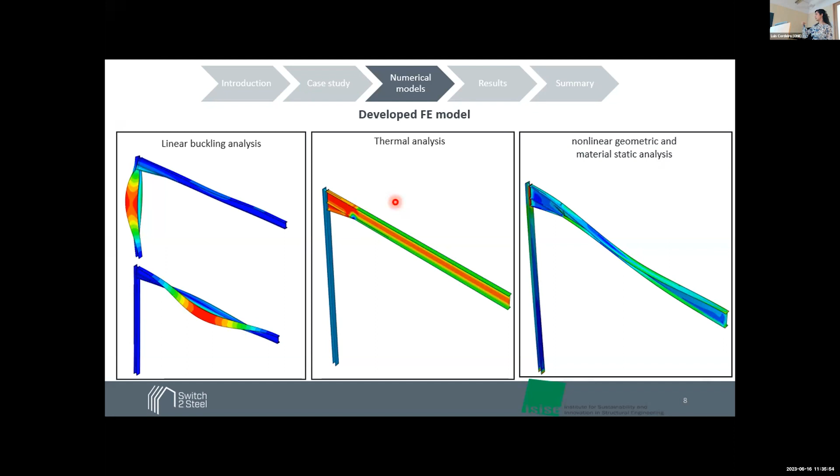These are some of the results taken from Abaqus, from the different analyses that I mentioned in the previous slide.

For the local and global imperfections, maximum magnitudes of L over 1000 and width over 200 were implemented in the finite element model for the structural analysis, as recommended in Eurocode.

Regarding the fire protection mechanical properties, experimental results available in the literature and some others obtained from tests carried out here were adopted in the finite element model.

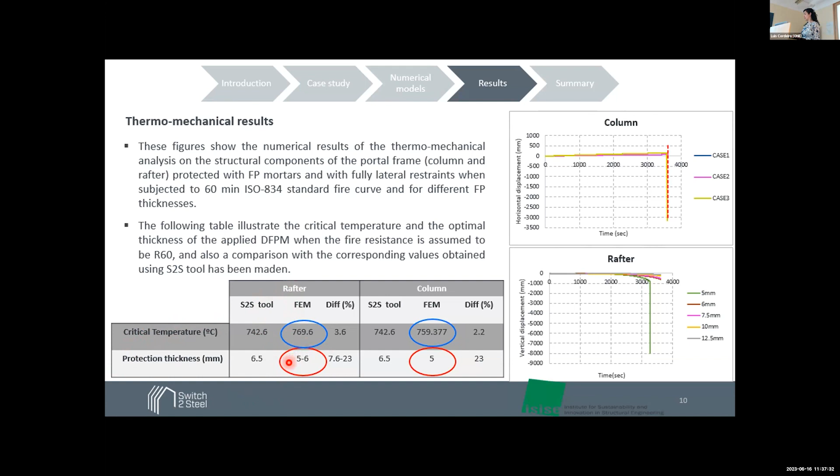The optimum protection thickness and the critical temperature is shown in this table. For the rafter, it was around 5 to 6 millimeters, and for the column, it was 5 millimeters. A comparison with the corresponding values obtained using the Switch2Steel tool has been made.

No significant difference was observed, and they are comparable. Now, in the next step, we remove the lateral restraints, which are shown in this figure, for the cases where the beams are not protected against the fire action. The optimum thickness of the fire protection and critical temperature on the rafter and column are obtained for this case without lateral restraints when it's exposed to the ISO standard fire curve.

These figures show the impact of removing the lateral restraint on the optimum thickness and critical temperature of the steel elements, when 60 minutes fire resistance is required. It's shown in the table that the optimal fire protection thickness is increased by up to 2 times. This shows the crucial role that removing lateral restraint plays on the critical time, maximum temperature of the elements, and fire protection thickness.

Another parameter that can have a significant impact on the structural steel temperature prediction and the fire protection optimization of these portal frames is considering the thermal properties of the fire protection as a function of its temperature. That is the case in reality.

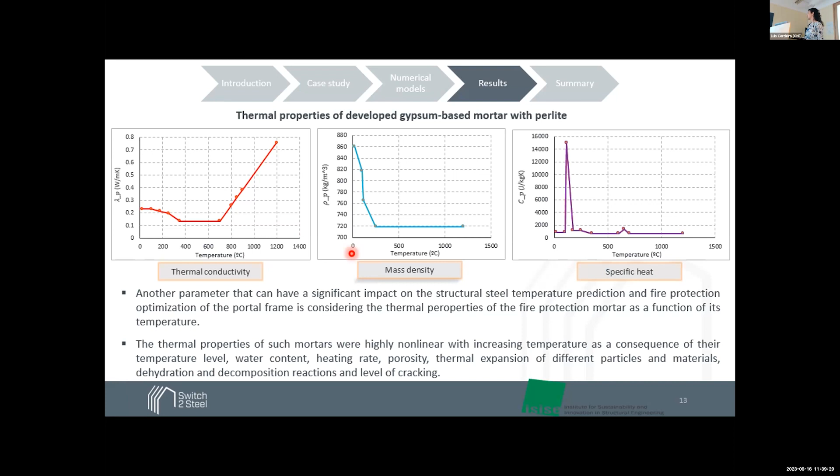The figures that highlight the influence of considering the thermal properties of fire protection as a function of temperature are shown here. As you can observe, there is a decrease in the calculated optimum protection thickness compared to the previous case, and the critical temperature decreases a little bit. The frame here is again exposed to the ISO standard fire curve for 60 minutes fire resistance.

So the next parameter we consider was the thermal action. Thermal action plays a crucial role in assessing the structural fire behavior of portal frame structures and optimizing them.

In this section, instead of using the standard time-temperature curve based on Eurocode and ISO 834, that assumes a uniform time-temperature relationship for gases surrounding the element, we use the natural fire curve. This model accounts for the effective heat flow transfer through the fire spread into the element.

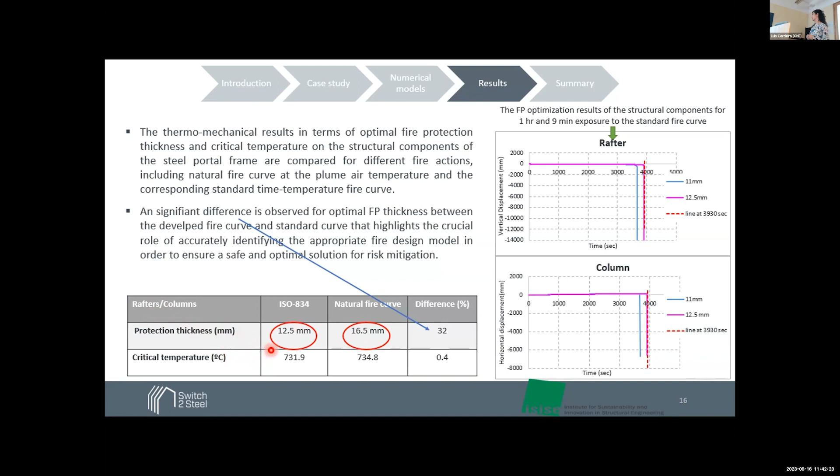The thermomechanical results in terms of fire protection thickness and critical temperature are shown here, and they are also compared with the corresponding standard fire curve. We can observe that for the natural fire curve, there is a significant difference in the optimum fire protection thickness, highlighting the crucial role of the thermal action in the fire protection optimization of these portal frame structures, to ensure a safe and optimal solution for risk mitigation.

Regarding the significant importance of accurately predicting the thermal action and fire scenario for fire protection optimization of these structures, another scenario is taken into account. In this scenario, the rafter is exposed to the same plume curve, but the column's lower part is exposed to a colder time-temperature curve, and the upper part is exposed to a hot air time-temperature curve.

These curves are also estimated using the CFast programming code. I just got the results, so I didn't have enough time to put that here, but the results indicated that maintaining the optimal fire protection thickness for the rafter was around 17 millimeters. The column doesn't require that much fire protection by considering this fire scenario; the optimum fire protection thickness for the column was less than 5 millimeters.

That was not too much considerable.

As a summary, a comparison between the thermal and thermomechanical results obtained from the finite element simulation in Abaqus and Switch2Steel show that the Switch2Steel tool proves to be a reliable tool for fire design of steel frame construction, and it also helps reduce the computational time in steel frame construction.

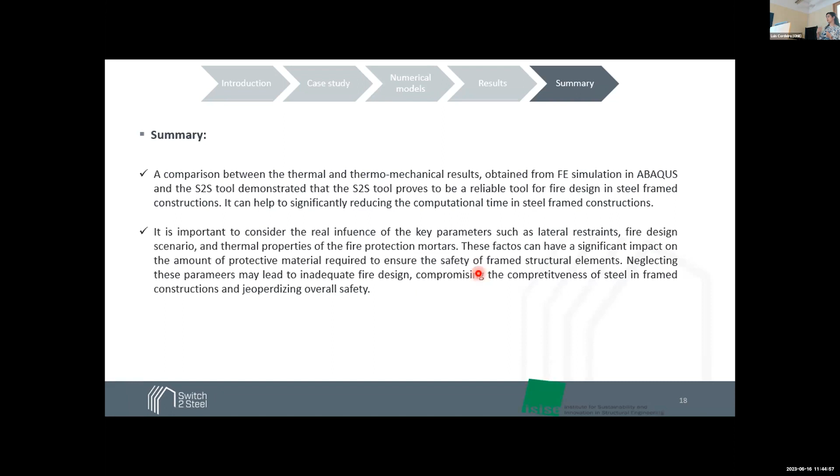It's exactly the same that Philippe told us in the previous presentation, and it's important to consider the real influence of key parameters such as lateral restraints, fire design scenario, and thermal properties of the fire protection, because these factors can have a significant impact on the amount of protective material used in steel frame structures to protect them. Neglecting them may lead to an inadequate fire design, compromising the competitiveness of steel frame construction and jeopardizing overall safety.

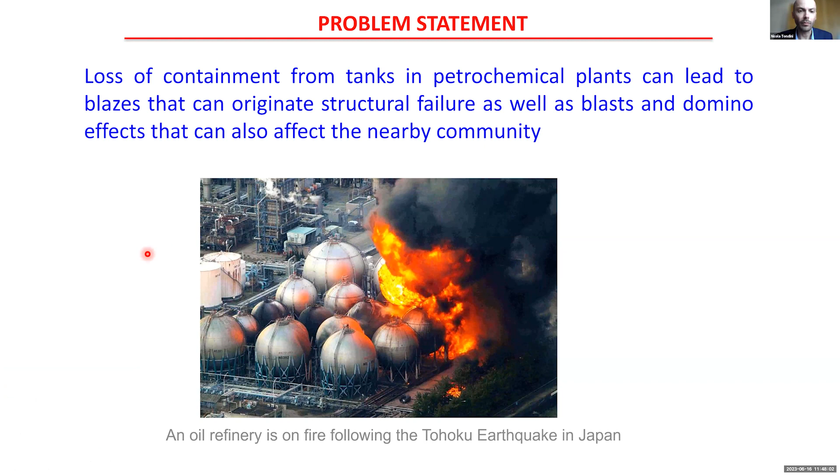Here there are other cases of accidents involved in industrial plants where there were fires. Of course, if the plant has storage of hazardous substances, they can also have blasts, for example hydrocarbon fuel. As we can see in these pictures, when we have supporting structures like pipe racks or tanks, we may have structural failure, impacted by these fires that, most of the time, because they happen outdoors, are localized, though they can be quite large.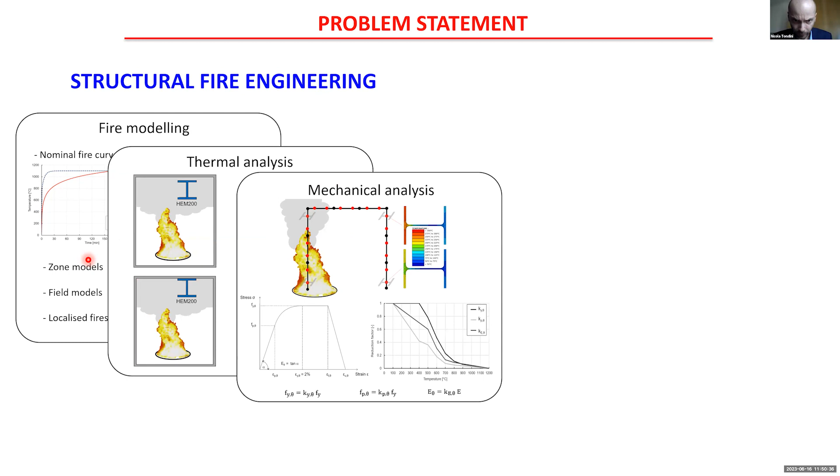There are also some protection strategies we can apply: for example, active fire protections, venting systems, smoke curtains, sprinkler systems, or passive fire protections such as concrete encasement in concrete composite structures, intumescent paints, sprays, or boards.

And in the end, how can we check a structure? Typically it is done according to Eurocodes or codes that are based on the semi-probabilistic approach.

So there are some characteristic values that are derived by means of probabilistic analysis, but in the end what we perform is a deterministic analysis. Otherwise, we can employ a fully probabilistic approach where the uncertainty of the parameters is explicitly used in the structural check, here for example with probability distributions, and then we can build fragility curves.

Let's start with the localized fire definition. Typically, when in compartments the flashover is unlikely, or in the initial phase of the fire, as Aldina said in the first presentation, in large warehouses or commercial buildings the fire load is such with respect to the size of the compartment that we can have a very non-uniform distribution in the building. So localized fires can also be a source of hazard in this kind of structures.

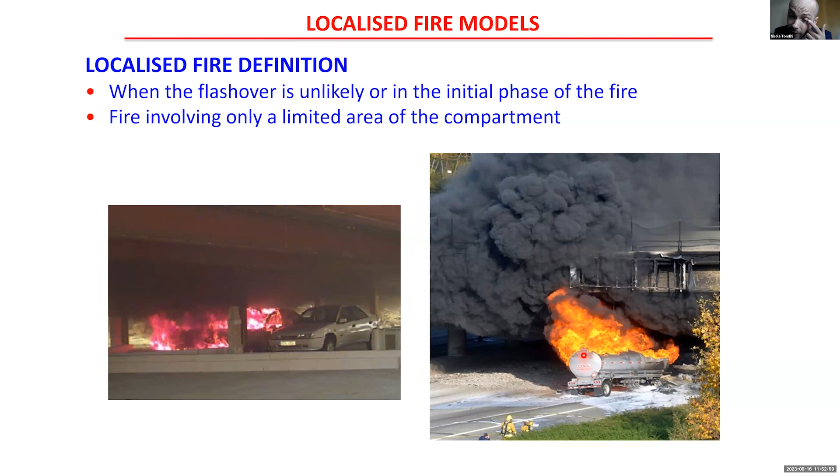For example, in open car parks, also when there are cars that burn, or other examples can be airport halls or rail stations. And here is another case that can occur: this is a truck that burns underneath a bridge.

The modeling of localized fires can be done by means of analytical models that are typically simplified. Some analytical models, as I will show later, can be found in the standards, particularly in the Eurocodes, or we can use some numerical modeling, for example computational fluid dynamics, that of course is much more demanding in terms of computational burden.

Here is what is inside the Eurocode at the moment in its present form. The localized fires are treated in Annex C of Eurocode 1, Part 1.2. Basically there are two models. The first one is based on the Heskestad correlations that can be used to predict the flame length and also the temperature along the localized fire axis, and is typically used when the flame does not impact the ceiling.

Whereas there is another correlation implemented in the present form of Eurocode 1, the Hasemi correlation, that allows computing the heat flux received by a structural element at the ceiling level. It is typically employed when the flame impacts the ceiling.

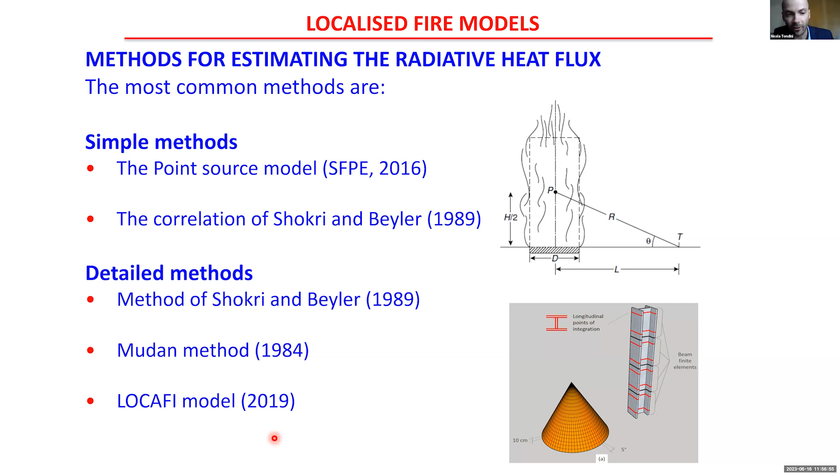Shokri-Beyler also developed a more sophisticated method, and also the Mudan method. The Mudan method is also included in some American standards and NFPA 555. And also the Locafi model that was developed, let's say, almost 10 years ago in an RFCS project, a European project.

So why was there this need to develop a new model? There were already models available in the literature, so why did this development end up in the Locafi model? Because the other methods, being analytical methods, have some limits in their application field.

What we were looking for was a model that can be used across all ranges of heat fluxes. For example, the methods I mentioned before are not valid, or not very accurate, in some intervals of heat fluxes, or they have a high variation in the data. We wanted to develop something with low variation in the data, and also safe without applying safety factors.

We also wanted to model something that can estimate the heat flux on all four faces that compose the cross-section of the column, not only the target directly impinged by the heat flux. And we wanted to exploit the localized fire correlations already implemented in Annex C of Eurocode 1 Part 2, such as the Heskestad correlation.

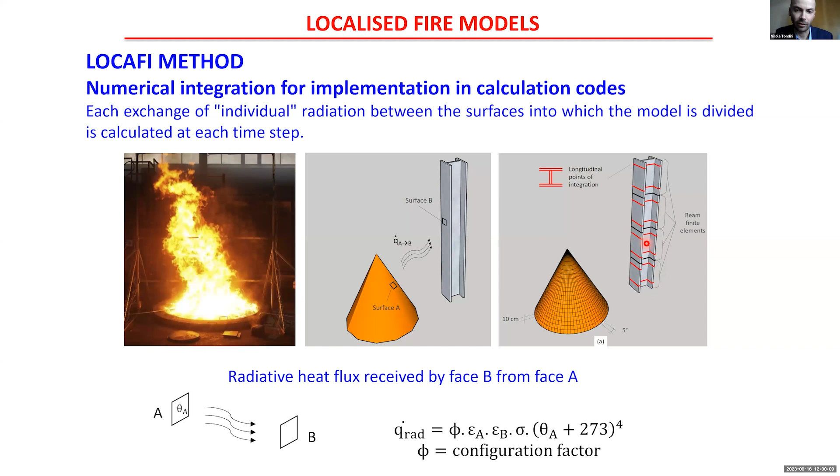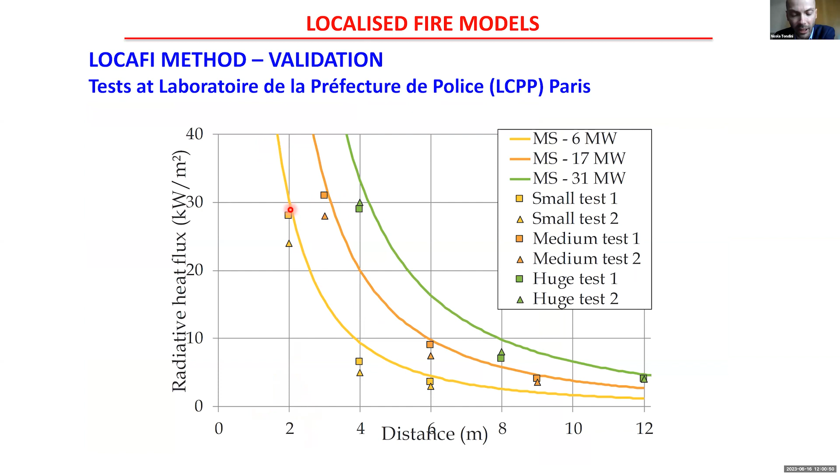Here are a couple of slides of the validation of the Locafi model, performed after the RFCS project Locafi. This was done in Paris - a large fire, up to 31 megawatts within a hangar. The curves show the prediction given by the Locafi model, and the points are what was measured in the test. You can see that the radiative heat flux is always higher for the Locafi model.

Here is the description of the case study we used - an actual case study, a refinery located in central Italy on the eastern coast. Here we had the data of this supporting structure close to the tanks, and here we had the pipe rack, with many pipes on it. The structure is not protected, so of course we simplified it a little bit.

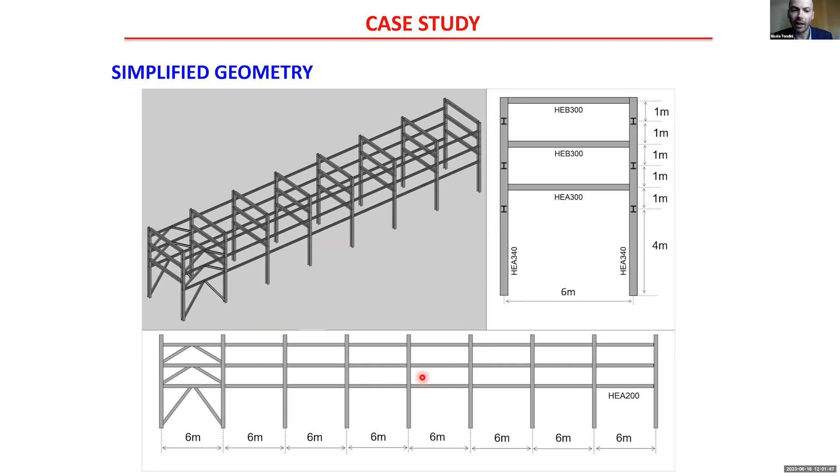The structure is a moment resisting frame with respect to the short span, whereas it is a braced frame with respect to the longitudinal direction. Here are the loads that we applied to the pipe rack, estimated based on the liquid passing through the pipes, and some operative loads applied during the working phases of the steel pipe.

Since we performed an analysis that wanted to explicitly include the uncertainty of the parameters, we had to decide what were the main relevant uncertain parameters. So we decided to include the fire in terms of its size - the diameter, and the type of fuel. We decided to use different fuels, and based on this choice, we had some uncertainty in the heat release rate, and also in the position of the fire with respect to the structure.

On the structural side, what we included is the steel material properties, so uncertainty mostly in the yield strength, and how the yield strength varies with temperature. Of course, there are other parameters that can be included, for example loads - but in this case loads were not well defined, so we didn't include their variation. Wind can also be a main source of variation impacting structural behavior, but in this case we didn't include it.

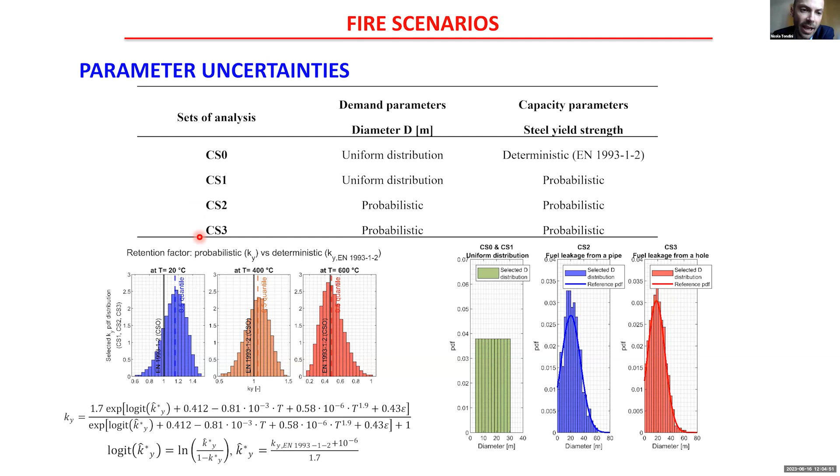In the third and fourth cases, there are two different scenarios where the fire diameter is based on the type of leakage that may occur in a petrochemical plant. For example, we may have leakage from the tank or from the pipe, and this can lead to different phenomena in predicting the diameter of the fire.

Here, for example, this is how we compute the diameter of the fire based on the leakage from the tank or from the pipe. Here, the driving force of the determination of the fire diameter is the hydraulic pressure. So we use fluid mechanics concepts in order to determine the diameter of the fuel that leaks from the tank or from the pipe.

That is based on different parameters: the height of the liquid, the diameter of the tank, the diameter of the hole, the length of the pipe, and where the hole is with respect to the height of the fuel. All these parameters were considered in order to derive the probability distributions of the fire diameter based on the liquid through a hole from the tank and the liquid from a pipe.

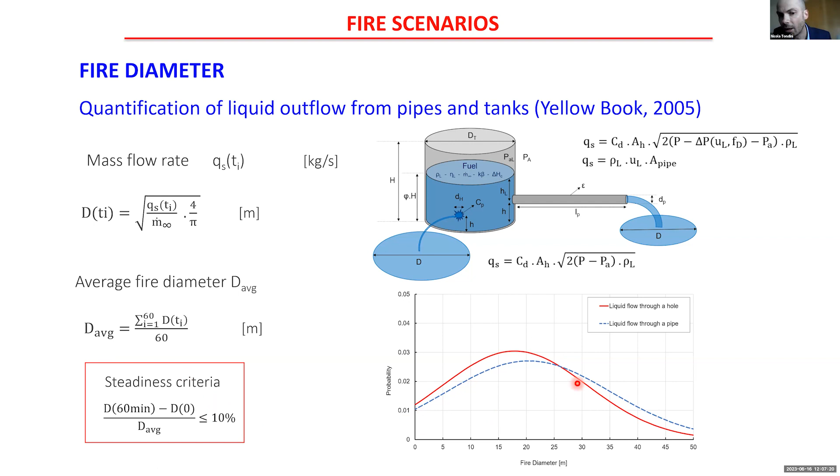In case study 2 and 3, we used these distributions, and then we used Latin hypercube sampling in order to sample all the values.

Here, for example, in case study 0 and case study 1, there is a uniform distribution of the diameters. We used 11 diameters from 5 to 30 meters, distances from the structure from 0.5 to 6 meters, and also 7 fuels with different properties, like heat of combustion, that can lead to different rates of heat release.

So to build up the probabilistic framework, we had to decide on the intensity measures that can characterize the severity of the fire, and also the engineering demand parameters that characterize the structural response. Then we applied methods to build up the fragility functions, and also established the efficiency and sufficiency of our probabilistic models.

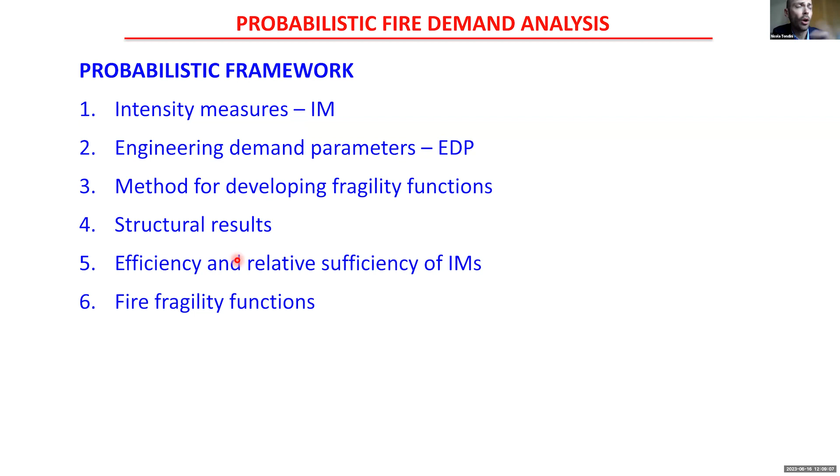So here are the intensity measures that can characterize the fire severity. Some of them are quite straightforward, like the diameter of the fire, the structure-fire distance, the heat release rate, and L/D, which is the fire position with respect to the fire diameter. But others are less straightforward, for example the maximum average heat flux impinging the structure.

We analyzed all of them since they are not easily found at the beginning in the literature, so we had to think about them. L/D, for example, is a function of the diameter and the structure-fire distance. And the maximum average heat flux impinging the structure was computed according to the analytical point source model.

For the engineering demand parameter that characterizes the structural response, we considered the interstory drift ratio, the axial load in the structural elements, bending moment, and the maximum or average temperature in the structural element. What we found relevant for this case study was the interstory drift ratio, because it is independent from the fire scenarios, it is easy to evaluate, and it is a global parameter of the structure. We could also relate it to damage states deriving from seismic engineering, for example from FEMA 356.

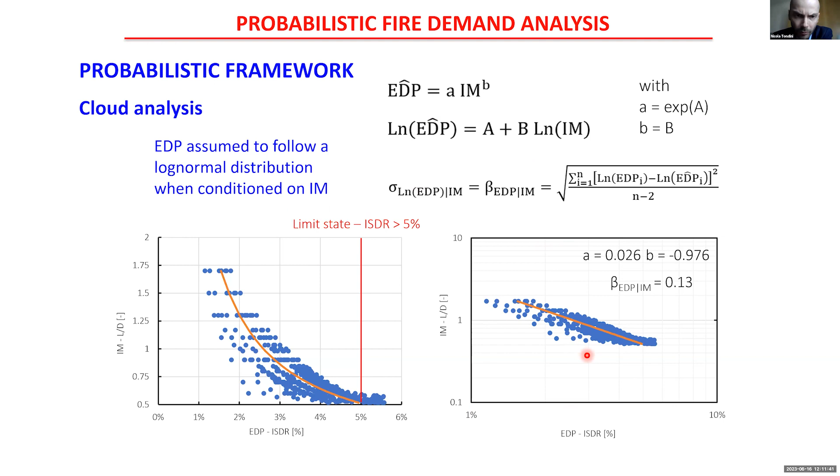Here, for example, in the end, what we would like is to build up fragility functions in order to see the probability that an engineering demand parameter is larger than a limit state when conditioned on an intensity measure. We took two limit states related to life safety and to collapse limit states, and here is an example of fragility curves that I will go into more detail on later.

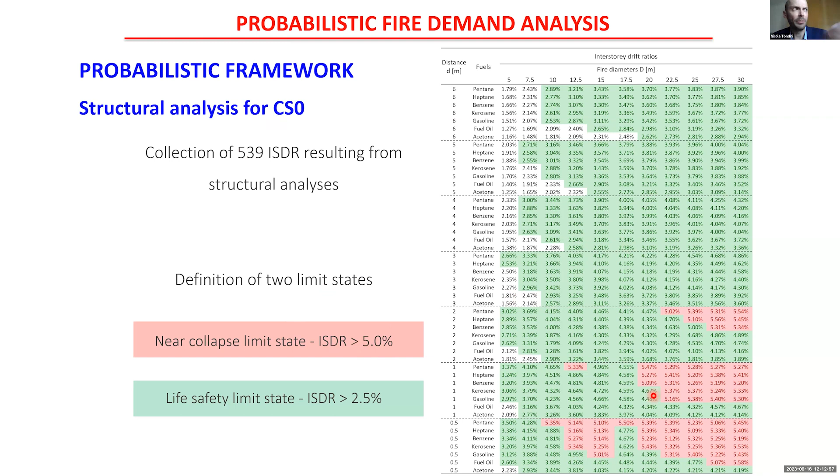Here is the structural analysis results of one case study, case study 0. In green are the life safety limit states, where the interstory drift ratio is higher than 2.5%, related to the life safety limit state. And here at 5%, which is very close to near collapse. From these we can build up the fragility functions related to the two limit states.

What we also have to perform is to check the efficiency and sufficiency of our probabilistic models. Efficiency means that our intensity measure can be considered efficient when there is low variation between the predicted engineering demand parameters and the actual engineering demand parameters based on our probabilistic demand model. When the log dispersion is less than 0.3, the intensity measure can be classified as efficient.

There is also a sufficiency requirement: when the structural response, the engineering demand parameter, doesn't show correlation with the parameters that define the demand. In this case, sufficiency was determined relative to the intensity measures we considered.

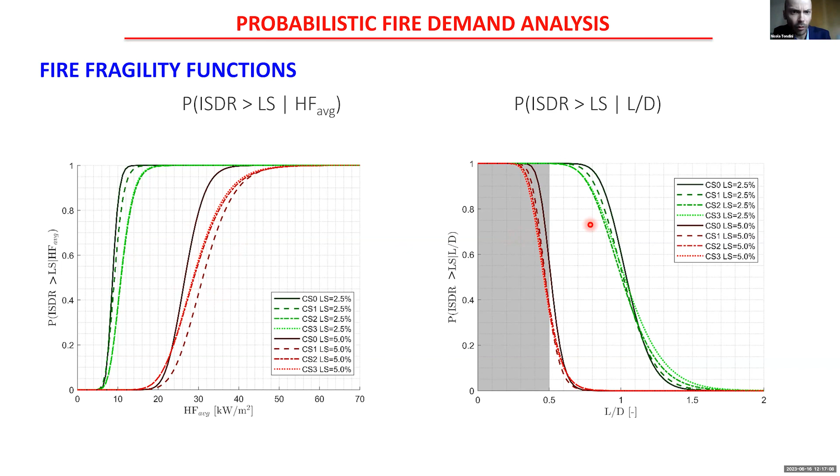So to finish, I hope that was more or less within 20 minutes. So here is the conclusion.

We developed a probabilistic fire demand model for a steel pipe rack exposed to localized fires. In this presentation I only showed the fragility functions developed by means of cloud analysis; we also used multi-stripe analysis.

The maximum transversal interstory drift ratio was found to be the most suitable engineering demand parameter. In terms of intensity measures, the maximum average heat flux impinging on the structure and the ratio between the fire position and the fire diameter, L over D, were the most efficient intensity measures to characterize the fire severity, and also the most sufficient relative to the other intensity measures we used.

We could build up these fragility functions that can be used to assess and quantify the structural capacity of this steel pipe rack.

In future works, we would like to use multiple pool fires and also consider the presence of wind.